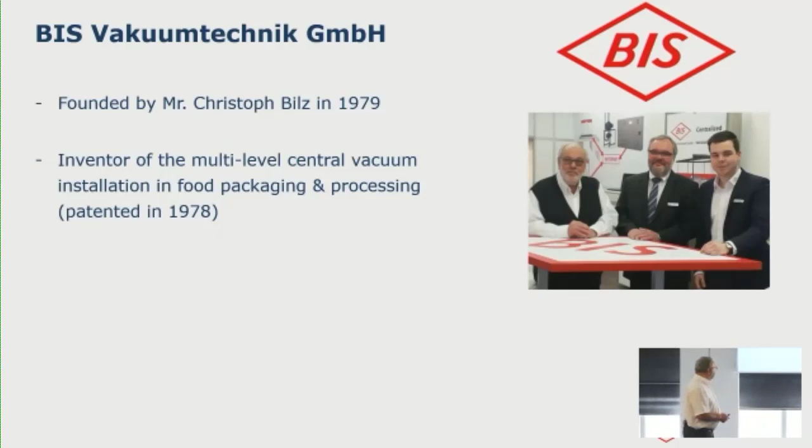Today, I am the general manager. I made an apprenticeship in a physical lab, where I worked for 6 years in high vacuum technology. Besides this, I attended night school, and afterwards I studied physics.

You see the three guys there on the almost white side - this is my son, he has now been in the company for 2 years also. We are located in Hennef, in the area of Cologne, nearly in the middle of Germany.

We work with approximately 20 workers up to now. We are focused on vacuum technology in the food industry. Vacuum is used in a wide range all over industry, but only in a small part - the packing industry - is where we work, where we are focused.

That is to say, we project, build, and maintain central vacuum systems. We repair and overhaul vacuum pumps. We have our own lab for the calibration of vacuum meters. And we make package testers - small testers where you can check if your package is tight or not.

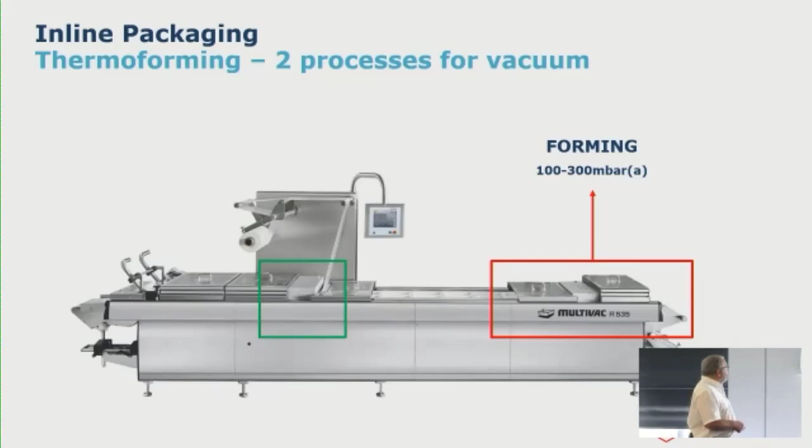Furthermore, we need vacuum for the sealing station, where the package is evacuated and afterwards sealed. Typical final pressure is between 2 and 20 millibar, depending on the product and on the type of package.

Why do we need vacuum? We need vacuum because of the lifetime of the product. Because food has bacteria, and the growth of bacteria depends on oxygen. Therefore, we have to reduce the oxygen in the package. We can do this by evacuating the package and sealing it.

We have a vacuum package. Or we can make a MAP, a modified atmosphere package - that is to say, evacuate to a pre-selected final pressure, and then regas with any gas like nitrogen or CO2. So we want to decrease the residual oxygen.

But what does it mean? How can we calculate the residual oxygen in a package, in a MAP? Air is a compound of nitrogen, oxygen, and some other gases like noble gases. Approximately 21% of the gas in the atmosphere is oxygen.

If you now make a MAP, evacuating and regassing with CO2 and nitrogen, the concentration of oxygen in the package afterwards can be calculated with this equation: the concentration of oxygen is the reached final pressure during the evacuation process divided by the pressure after regassing, multiplied by 21%.

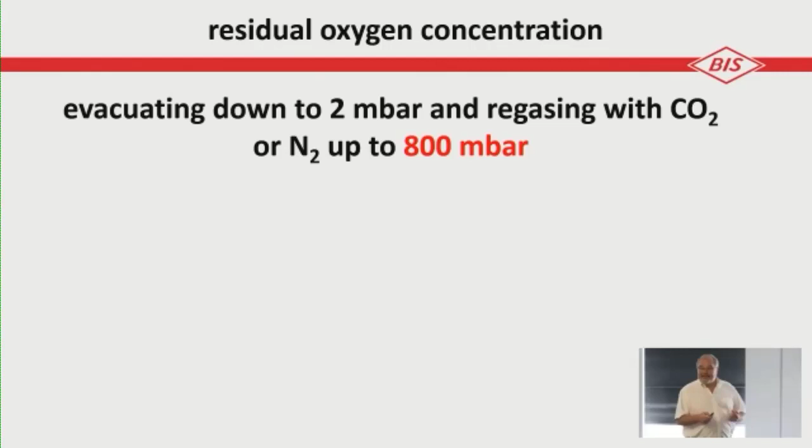Another example: we evacuate once again to 2 millibar, but now we're gassing only up to 800 millibar, not 1000 like before. Now the concentration of oxygen is only 0.05%, so this is very important. The residual oxygen concentration in a package depends on the final pressure during evacuation, but also on the pressure reached with the regassing of the sealing chamber. Mostly used is regassing up to 1000 millibar. So the residual oxygen is the final pressure multiplied with 0.02 in percent. Normally, if we want to reach a residual oxygen concentration lower than 0.1%, we need a final pressure of minimum 5 millibar in the package.

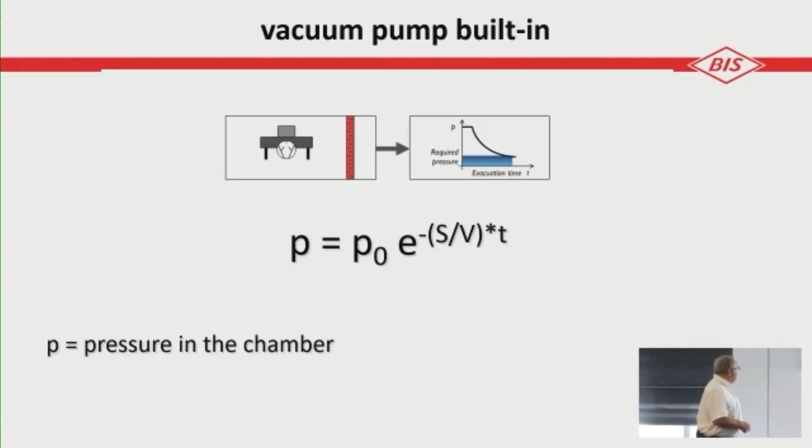P is the pressure in the chamber, P0 the starting pressure, S is the pumping speed of the installed vacuum pump, and V is the volume of the chamber. With this equation, it is very easy to calculate what is the required pumping speed, or what is the time we need to reach a desired pressure.

But that's not quite true, because this equation is only usable if the pumping speed of the vacuum pump is always constant with the pressure. Later on we will see this is not the case. So therefore, the calculation of evacuation is a little bit more complicated.

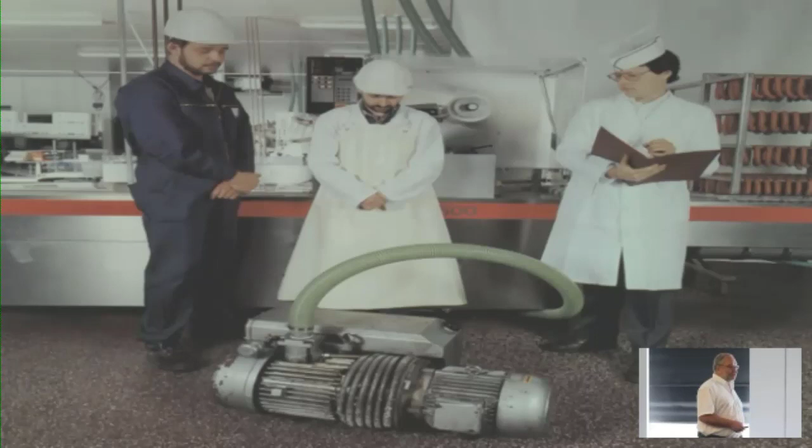Okay, the vacuum pump is in the machine, but the vacuum pump is not without any problem. The vacuum pump will make noise, it will make heat, and if you have a normal rotary vane pump, the total power draw of the vacuum pump is transferred into heat in a cooled, hygienic room. The next point is the hygienic aspect: the pump is oil lubricated, so we have the danger of oil contamination to the fresh product. We have a disrupted energy balance because the room is cooled and we have to cool down the heat load from the vacuum pump. And next point, if the pump fails, or if you need to do maintenance on the pump, you have to stop the whole packing line till the pump is repaired or removed. So therefore, there are some good reasons to remove this vacuum pump from the hygienic area where fresh, cooled products are packed.

What will happen if we remove the vacuum pump? The vacuum pump is out of the hygienic room, and we have a pipe between the pump and the packing machine. Now let's look again at the E function. First, the pressure drops down a little bit - the pipe is pre-evacuated by the vacuum pump - and now the vacuum valve is opened, and we have a very fast pressure equalization between the chamber and the pre-evacuated pipe. Therefore, the pressure drops down, let's say from 1000 millibar maybe to 850 millibar. But now the vacuum pump has to evacuate the volume of the chamber through the small pipe, which means we need much more time to reach the desired final pressure.

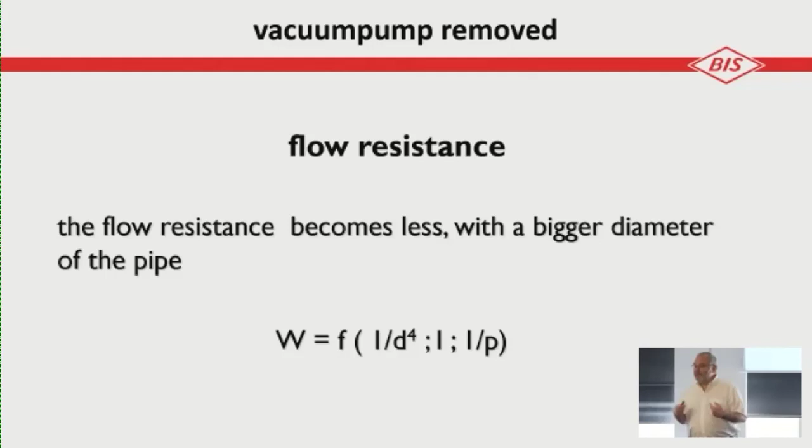So that is to say, the effective pumping speed at the packing machine depends on the pumping speed of the vacuum pump and on the conductance. And the conductance of a pipe is 1 over the flow resistance.

Should be more than enough? No, because now S over L is 1, and so the effective pumping speed is only 50%. So vacuum pump, 300 cubic meter per hour, and a pipe with a conductance of 300 cubic meter per hour - that means we have, in effect, only 150 cubic meter per hour, not more.

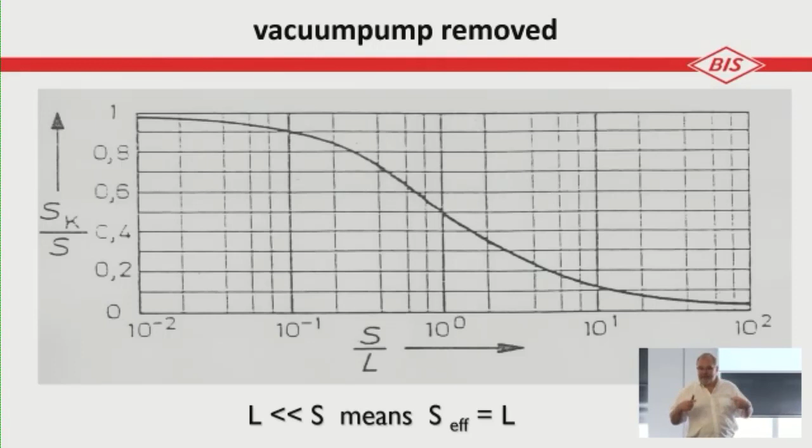So, very simple - let's use a big pipe. No problem with the flow resistance, everything clear.

But the next point is the effect of the volume of the pipe. If I have a pipe between the vacuum pump and the packing machine, I have an additional volume which has to be evacuated within each cycle. And the volume depends on the length of the pipe, and it's also depending on the diameter up to the power of 2.

So the effect of volume tells us we need small pipes, but the flow resistance tells us we need big pipes. And that's a problem - I have 2 effects working against each other. Of course, I can calculate the best fit for the pipe, but nevertheless, the evacuation time becomes much longer than before.

Let's make an example. We have a packing machine with a chamber volume of 13 liters. We want to reach a final pressure of 3 millibar, evacuation time 1.5 seconds. The pumping speed which is required is 181 cubic meter per hour. I have calculated this, so we use a pump of 250 cubic meter per hour, normally a rotary vane pump.

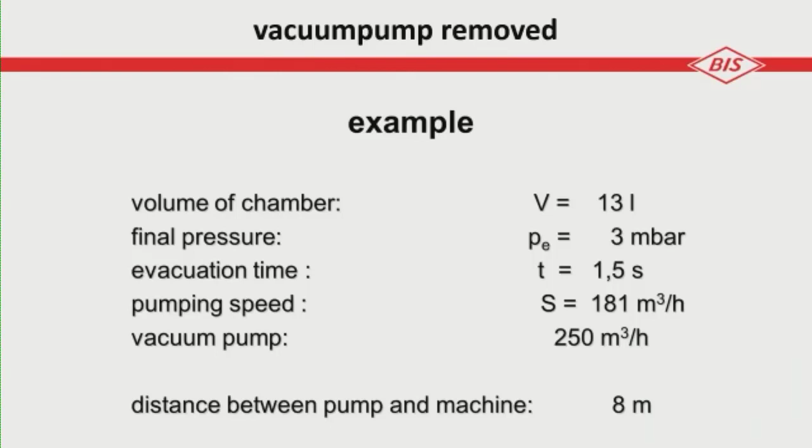But now the distance between the machine and the vacuum pump is 8 meters. I have calculated first a flexible hose with 1 inch, 34 millimeter inside. The volume of 8 meters of the pipe is 7.3 liters. The conductance is 396, so I need a vacuum pump of 800 cubic meter per hour.

If I use a 2-inch pipe, more volume, but also a bigger and higher conductance, I only need 480 cubic meter per hour. But if I use a 3-inch pipe with 90 millimeters inside, 51 liters, very high conductance, but now again I need 680 cubic meter. So for this example, the best fit is the flexible hose in 2-inch.

If I have a bigger pipe, I have less flow resistance, but more additional volume. So it is possible to calculate the best fit, but nevertheless, instead of 250 cubic meter, now I need 480 cubic meter per hour.

And by the way, there are some things written in a lot of books about vacuum technology which are definitely wrong. One of these is that the diameter of the pipe always has to be the same as the sucking connection of the vacuum pump. This is pure nonsense. You always have to calculate the best fit, it's not dependent on the connection of the vacuum pump.

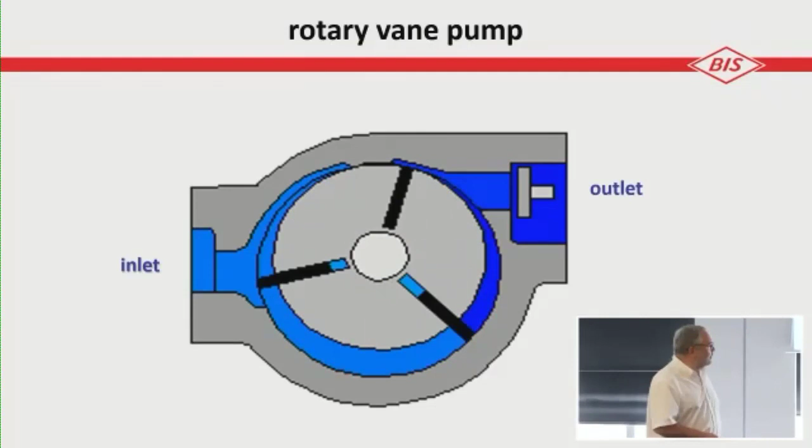So the 300 cubic meter pump we have at atmospheric pressure. At 10 millibar, we have maybe 220 cubic meters per hour. At lower pressure, we have 100 cubic meters per hour.

Okay, let's talk about booster pumps. This is a booster pump, also called a Roots pump, named after the inventors of the pump, 2 brothers named Roots. They found this pump in the States by removing the counter for gas in their house and adding a motor.

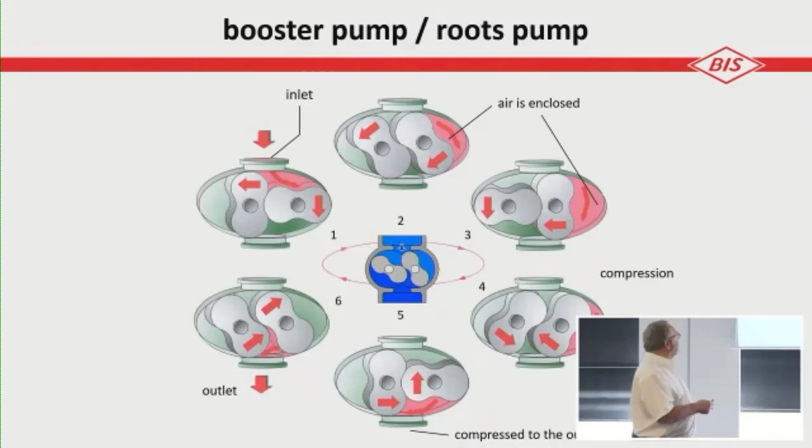So therefore, the maximum pressure difference between the sucking connection and the pressure connection is, let's say, approximately 50 millibar. That is to say, the booster pump can only compress from, let's say, 1 millibar to 50 millibar, but not from 1 millibar to 1,000 millibar. So therefore this pump cannot be used alone - we always need a backing pump.

Here's the booster pump. We have the sucking connection, we have the outlet. Here is connected a backing pump, which is making the compression work. That is to say, the booster can suck at 1 millibar, compress to 50 millibar, and we need a backing pump compressing from 50 millibar to 1,000 millibar.

But now we have to avoid the pressure difference being higher than 50 millibar, because otherwise we will destroy the pump. The easiest way to handle this is the so-called overflow valve. It's nothing else than a weight, and if the pressure difference is higher than 50 millibar, this is pressed up and we open a bypass, and the pump is safe. On the other side, the pumping speed goes down because we have a bypass around, but we have saved our vacuum pump. So that is to say, we have a backing pump, we have the booster pump - the combination - and the bypass valve.

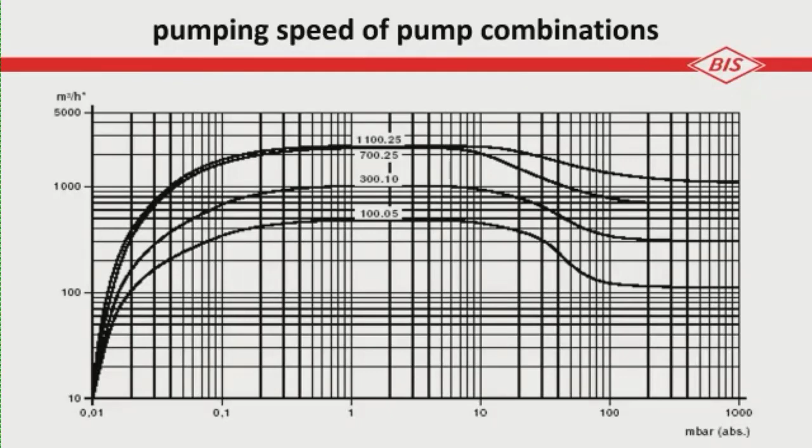So this is not very satisfying. We have paid a lot of money for a booster pump, but without any effect. So let's make a trick. And the trick is a buffer.

Between the booster pump and the backing pump, we use the buffer, a big pipe, so we can remove the vacuum pump, the rotary vane pump, out of the packing area. Let's remember, we have talked about hygienic problems, warming up in the room, and so on. Therefore, the oil lubricated and hot vacuum pump is out of the room. And here we have the buffer.

Now the vacuum valve opens, 1000 millibar in the sealing chamber. We open the vacuum valve, and now we will have a very, very fast pressure expansion between the small volume of the sealing chamber and the big buffer. The air runs through the booster pump and the pressure drops down directly to, let's say, 40 millibar. And then at 40 millibar, we have the booster pump directly running with full efficiency and a very short evacuation time.

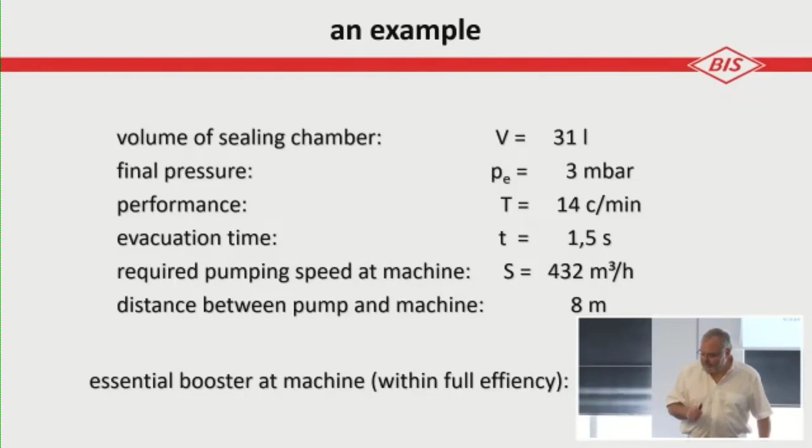Let's make a short calculation at this point. We have the sealing chamber, the packing machine. Then we have a lot of valves in the packing machines — valves for upper vacuum, for lower vacuum, for product vacuum. They are connected together, and then out of the machine, we have the suction connection for the vacuum pump, in 2-inch.

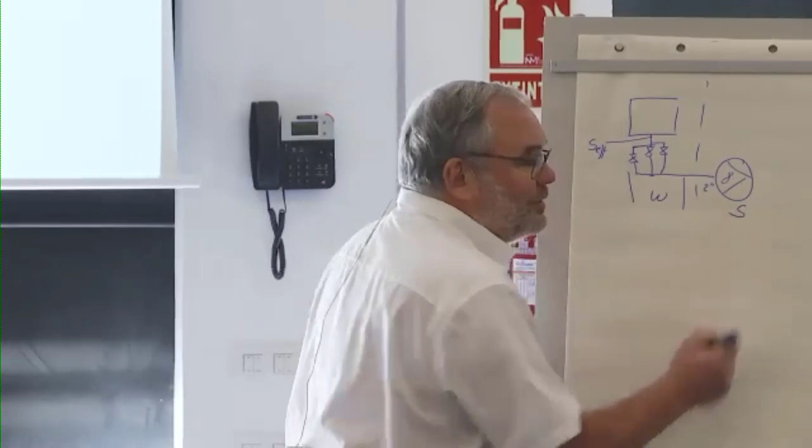Now we install a big pump here, a booster pump. We have the effective pumping speed at the chamber, we have the flow resistance, the internal flow resistance in the packing machine, and we have the installed vacuum pump. As you have seen before, 1 over the effective pumping speed is 1 over the pumping speed of the pump plus 1 over the conductance.

If we have... let's make an example. We use a vacuum pump of 500 cubic meters per hour.

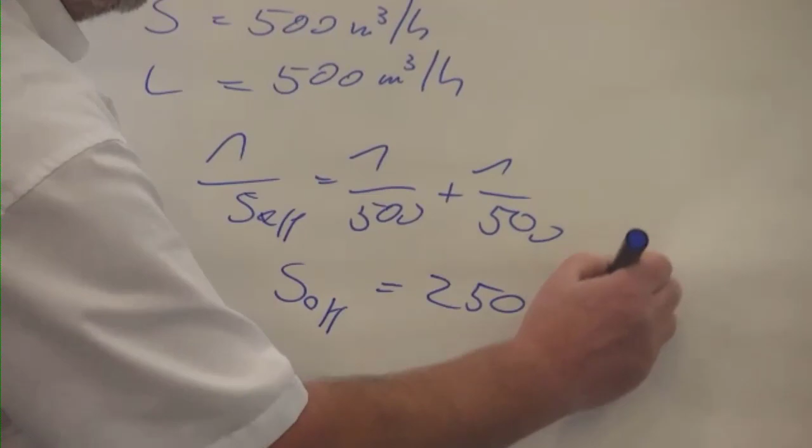The conductance in the packing machine is also 500 cubic meter per hour, so the effective pumping speed is 250 cubic meter per hour, not more. And now we use a bigger pump, 2000 cubic meter per hour.

Now I need my calculator. The effective pumping speed is now 400 cubic meter per hour. That has to say, we have installed a pump 4 times more pumping speed than before, but we have only 150 cubic meter more. So the problem is, it makes no sense to use such big booster pumps in packing machines because of the conductance in the machine. Much better is if we have the booster pump running all the time with full efficiency. What you have seen before makes much more sense than installing bigger and bigger booster pumps.

Okay, so it makes no sense to have a big booster pump. Let's make a clever solution: booster pump in the machine, buffer volume, and backing pump outside.

Yes, please, so I have a question. Okay, these calculations depend on the vacuum, the final vacuum, or is it always the same calculation? Does it work the same with packaging or is it the same with other applications? It is always the same. This equation does not depend on the pressure, not at all. This is over the whole range of the pressure, but the conductance is depending on the pressure. So the conductance of a pipe changes from 1000 millibar to 1 millibar, and there's an extreme change in the conductance. This is the reason why it's a little bit complicated to calculate the conductance. But nevertheless, this equation is not depending on the pressure. It's for the whole range.

Okay, we have our packing machine. We have learned a booster pump of 500 cubic meter per hour is more than enough. We have the buffer and the backing pump at 250 cubic meter per hour. What will happen?

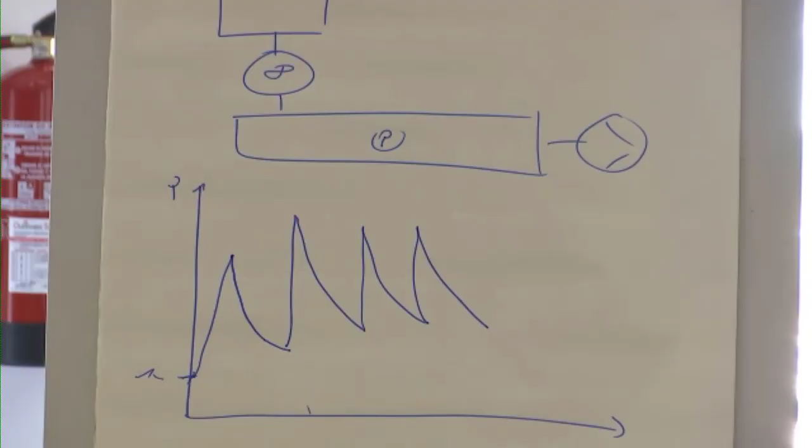Pressure goes up and down, up and down. And now we see the maximum pressure rising up, and now we can't reach the desired final pressure in the sealing chamber. So this will not work. After 6 or 7 cycles, they stop the machine because the display shows not enough vacuum.

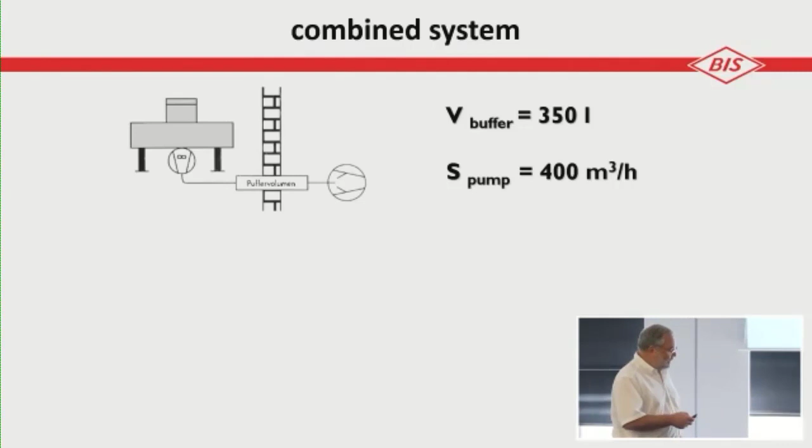Okay, let's try using a smaller buffer and a bigger pump. Just try it. Same again, but now after 3 cycles, the pressure in the buffer is too high. This does not work either. Okay, try the next thing: bigger buffer again, but maybe a smaller pump. And now it works.

So this is the problem with such a system. This system has to be calculated very well, because otherwise it will not work. So for each packing machine, depending on the volume in the sealing chamber and the required performance of the machine, I have to calculate the system.

And I've seen a lot of systems which are not working. And if I go to a packing machine, sometimes I can hear it. Because if I stand beside a packing machine with a built-in booster pump, and I hear the booster pump making a noise like a tram, going ooh, ooh, then I know that during this time, when the pump is so loud, the efficiency of the pump is 0. So therefore, this system has to be recalculated.

So the so-called combined system, yes please. Okay, another question - what's the way I can know what buffer I need and what pump I need and so on? This has to be calculated. Ask you? Yes, you have to ask me. Perfect, thank you very much.

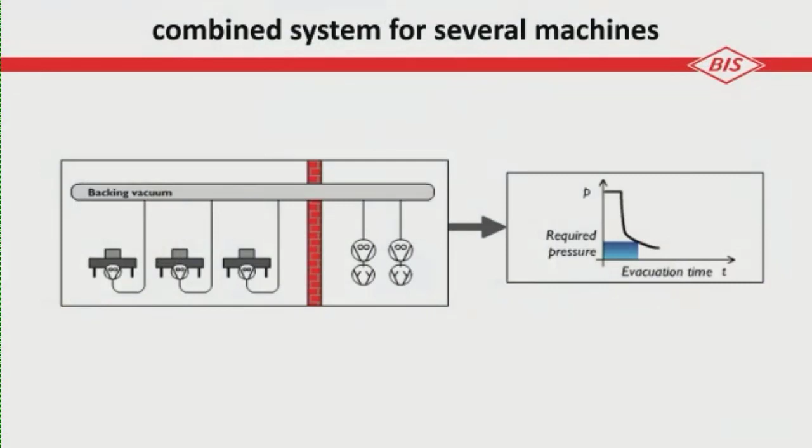Okay, the so-called combined system - it's also possible to make this for more than one machine. I have one backing pipe, a big backing volume pipe. I have the central vacuum supply out of the hygienic area, and in the machines, booster pumps are built in. That's a problem: for each packing machine, a booster pump is required. Therefore, this system is useful for packing plants with 2 or 3 packing machines. If there are more packing machines, this is much too expensive.

I have seen a lot of vacuum supplies, the so-called combined systems. I saw one approximately 8-10 years ago in Scandinavia, in Norway - a big meat processing plant with 20 packing lines. In each packing line, a booster pump, 2,000 cubic meters per hour. And in the machinery room, 6 rotary vane pumps, each 1,000 cubic meters per hour. And this is absolute nonsense.

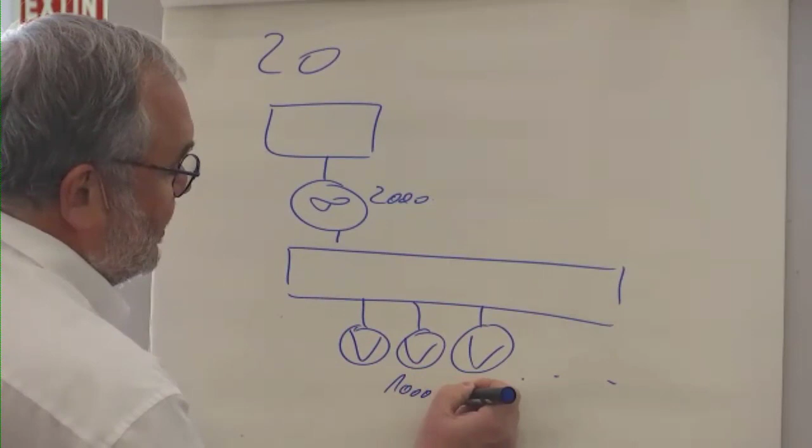So we have 20 packing lines, each with a booster of 2,000 cubic meters per hour. Then rotary vane pumps, each 1,000 cubic meters per hour. First thing we've seen before: if the system is well calculated, it makes no sense to have a 2,000 booster here - 500 is enough. The next point is that a rotary vane pump with 1,000 cubic meters per hour makes no sense in such a system.

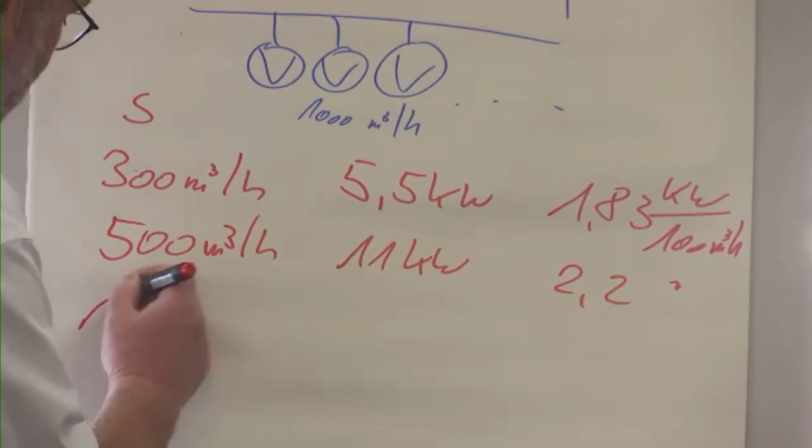Let's make an example. I have a rotary vane pump with pumping speed 300 cubic meters per hour, 5.5 kilowatts. That means 1.83 kilowatts per 100 cubic meters per hour pumping speed. A 500 cubic meter per hour pump, we have 11 kilowatts - that means 2.2 kilowatts per 100 cubic meters per hour. A 1,000 cubic meter per hour pump needs minimum 20 kilowatts, minimum - most times they have 30 kilowatts. That means 2.0 kilowatts. This is point 1: not to use such big rotary vane pumps.

Point 2: the cost for lubricants, oil, filters, and so on - they are rising up. So this makes no sense, the whole system makes no sense, with 20 booster pumps in each packing machine. Oh sorry, there's one good reason for this system - one good reason: to sell pumps, to sell big pumps. But that's all.

So that is to say, for a food processing plant with, let's say, more than 4 packing machines, the combined system makes no sense. It is sometimes used because it is easy to calculate and easy to build up such a system. But if we have more packing machines, we need another solution, and the best solution here is the totally centralized vacuum system - that is to say, no more vacuum pump in the packing room.

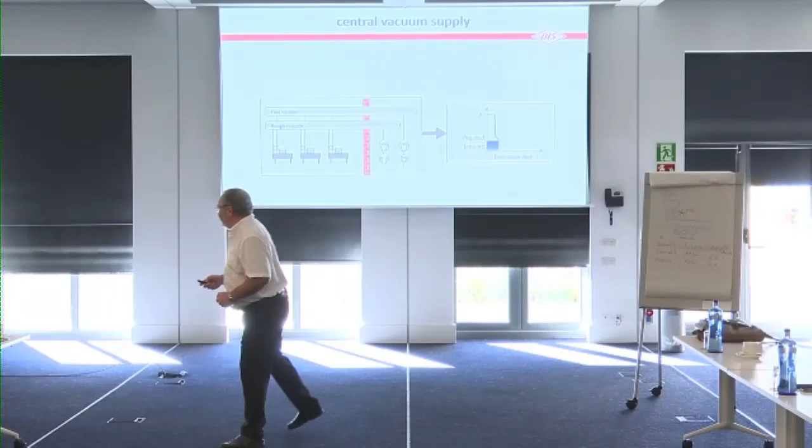It is true if you make the combined system with a booster at each machine and one buffer pipe - then we need the booster, and then you're absolutely right, the booster has to be directly as near as possible to the sealing chamber at the machine. But this is only if you have the combined system with one pipe. Now I want to show you a better solution, without any pump in the packing room. Sounds good, thank you very much.

You're welcome. So we have no booster in the machine, but now we have two pipes - one called rough vacuum, one called fine vacuum. In the machinery room, you have the vacuum pumps.

The rough vacuum is evacuated to a pressure level of approximately 50 millibar. And the fine vacuum is evacuated to a pressure level of 2 millibar.

Each packing machine is equipped with a special valve block. There are two valves beside it, connected to the sealing chamber. One valve is connected to rough vacuum, the other valve is connected to fine vacuum.

Now, if the machine wants to evacuate 1000 millibar, we open the valve to the rough vacuum, and we have a very fast pressure expansion between the chamber and the rough vacuum. The pressure goes down from 1000 millibar in the sealing chamber to the 50 millibar rough vacuum level. We close the valve, short delay, and we open the second valve for a second pressure expansion down to 2 millibar.

And this is the fastest possible evacuation of a fixed volume, the evacuation by pressure expansion. This is the so-called double-stage pressure expansion.

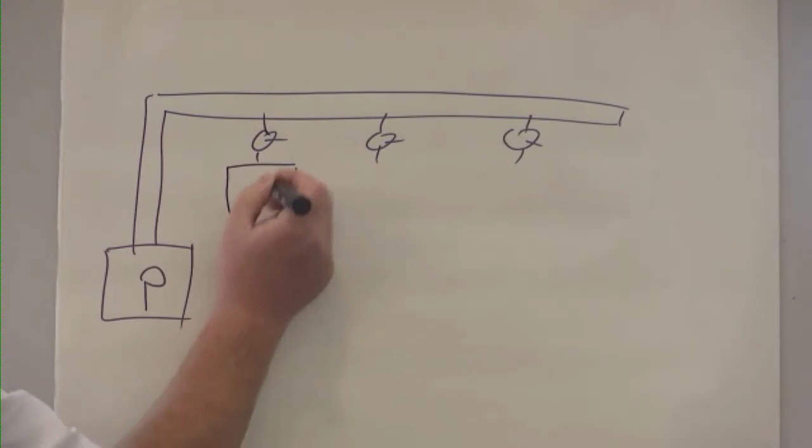They are starting with an experiment. The first student arrives early in the morning, 10:30. He connects his equipment, opens the valve, and he has compressed air, pressure coming out. The next guy arrives half an hour later, connects his equipment, opens the valve, and he also receives compressed air. It's less air than the first one had before, because now there are two machines connected, but nevertheless, air is coming out.

One week later, same physical lab, but now we have a system with vacuum. Big central vacuum supply downstairs, and in the lab, ball valves for each working place.

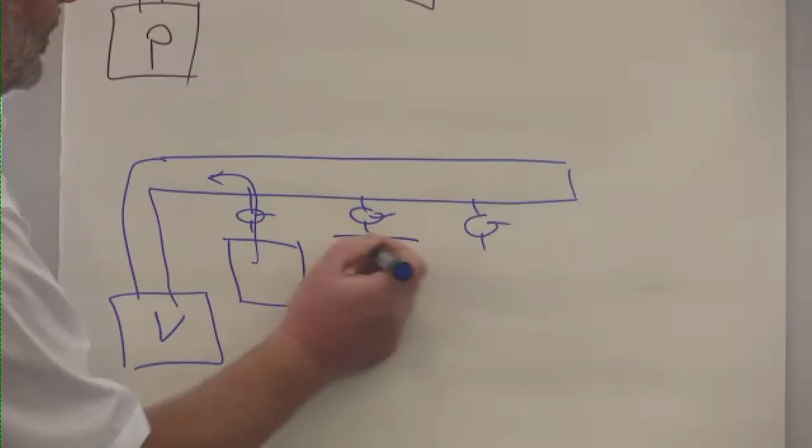The first arrives early in the morning, 10:30, connects his equipment, opens the valve, and the air is going out. He says, okay, everything works, and goes downstairs to have a coffee. The next one arrives half an hour later, opens the valve, the air goes out, and back at the first working place, air goes in.

And this is the big difference between vacuum and compressed air. If you have a compressed air system, you open a connection, air will always come out, it will never happen that air goes in. But this change in flow direction is possible with vacuum.

Now, if we have one vacuum pipe, one central vacuum station, and five packing machines, the first machine wants to reach, let's say, final pressure 5 millibar. At 10 millibar, the next machine opens the valve. Then we have to avoid that the pressure here rises up again from 10. So therefore, we need an enormous volume and an enormous pumping speed here, and this makes no sense.

It is possible with one pipe, but only if we have booster pumps in. Without booster pumps, with one pipe, it will not work. And the trick is the 2-stage system.

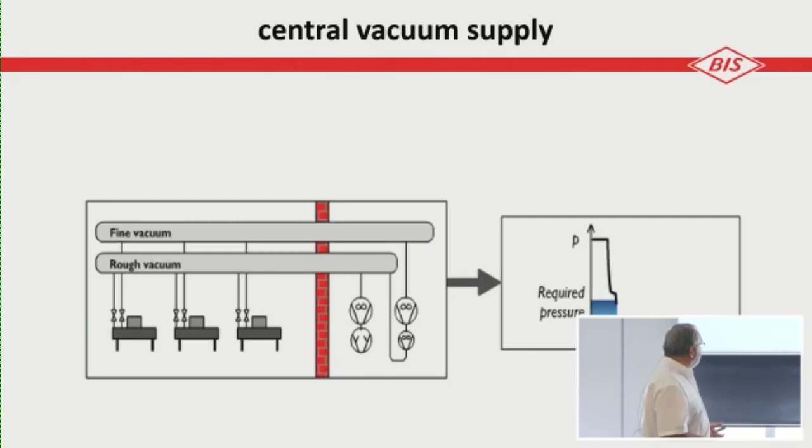So we have the fastest possible evacuation of the vacuum chamber by a double stage pressure compensation between rough and fine vacuum: first 50 millibar rough vacuum, short time delay, then 2 millibar fine vacuum. The shortest possible evacuation time now only depends on the internal flow resistance in the packing machine, and we have no vacuum pump in the room.

So the advantages are shorter evacuation time and less power demand. First of all, we do not have the vacuum pump in the room, so there's no heat up of the room. We are saving energy for cooling the room. And the next point is we need less vacuum pumps than before.

But why this? Normally this can't be - we have removed the vacuum pumps from the room, yet the machines become faster than before, and we need less pumps. Why? So what is the vacuum pump doing?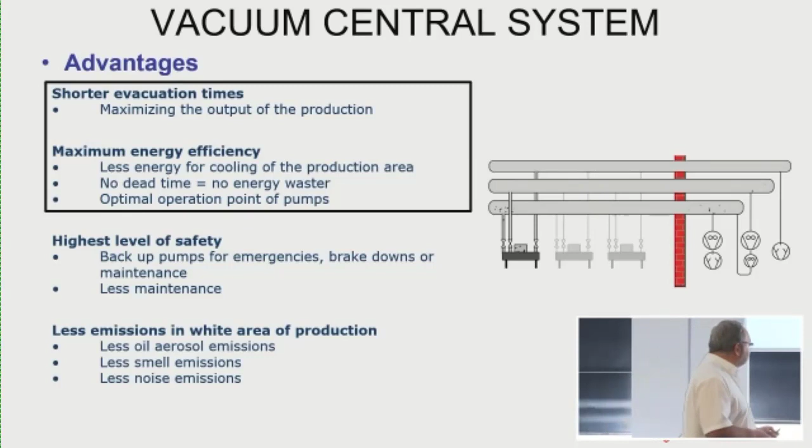So the working principle - we have the packing machines.

Sorry Felix, could I ask a question? Yes, please, yes please. Could you please explain these signs - what kind of pumps are these that you drew here? That's a very good question, thank you very much.

Before, I talked about two vacuum systems called rough and fine vacuum. Rough vacuum at 50 millibar, fine vacuum at 2 millibar. Now we have a third system here, auxiliary vacuum. The auxiliary vacuum is used for the forming of foil.

Why this? It's also possible to connect the forming station to the rough vacuum. Yes, of course it's possible, but it's not clever, because for the forming of foil we need, let's say, 150 millibar - that's more than enough. Only if you have a very thick film, maybe sometimes you need 180 millibar. More than enough - normally 150 millibar is more than enough to form the foil.

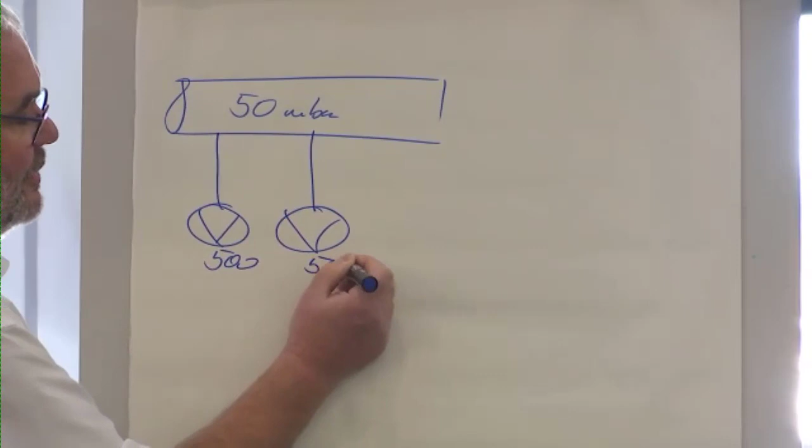Rough vacuum system, I need 50 millibar. I have calculated my system and seen, okay, I need a pumping speed of 1,000 cubic meters per hour. I can realize this with two backing pumps, each 500 cubic meters per hour. That means 22 kilowatt.

Or, I use one booster pump at 1,000 cubic meters per hour, and two backing pumps at 300 cubic meters per hour, 5.5 kilowatt and 3 kilowatt. That means 14 kilowatt.

And that's the reason why I like to use booster pumps. Booster pumps have a very high pumping speed with very low power demand. In the centralized vacuum system, I can install and run the booster pump always at the point of best efficiency. So therefore, we need booster pumps because we want to save energy.

That is to say, for the rough vacuum, we have a combination of a booster pump and a backing pump, a rotary vane pump, or also possibly a screw pump.

Fine vacuum. For fine vacuum, for the same reason, I also need a booster pump. But now I do not use a backing pump. I have a second booster pump and then go back to the rough vacuum. Why this?

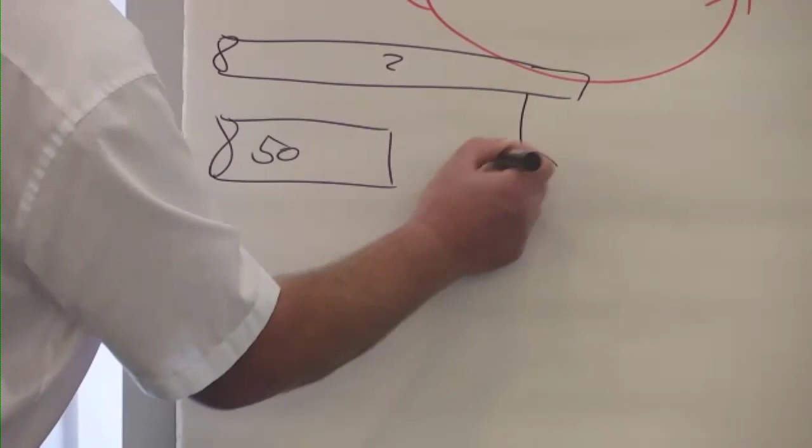We have rough vacuum at 50 millibar, fine vacuum at 2 millibar. I have a booster and a backing pump, 1,500 cubic meters meaning 14 kilowatt. But I can save this pump. I do not need this pump if I compress directly to the rough vacuum.

I have an additional load on the rough vacuum because the air from the fine vacuum also goes into the rough vacuum. But this is not a lot, because the volume of the chamber from 1,000 millibar to 50 millibar goes to rough vacuum. That's to say most of the air, 950 millibars multiplied by the volume, goes to rough vacuum, and only a small amount of air from 50 millibar to 2 millibar goes to fine vacuum. So for rough vacuum, it makes no big difference to also add the air from the fine vacuum. And I do not need a 500 cubic meter pump, and I can save 11 kilowatt.

So therefore, the fine vacuum is evacuated by a booster pump, which is compressing to the rough vacuum. But why do we have two pumps?

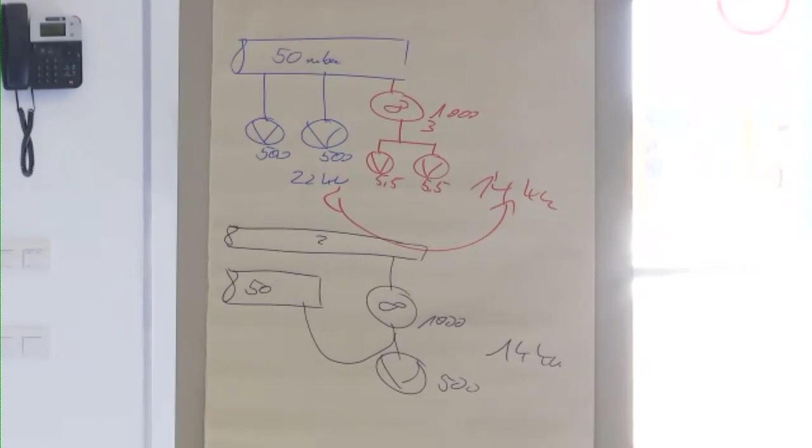Hello, I have a question in the chat from David: when does it make sense to apply this hybrid fine and rough vacuum system, between which pressures, from where to where? Is this always the best solution?

It depends on the number of packing machines, and on the performance and required final pressure of the packing machines. Normally, for 1 or 2 packing machines, the best solution is a combined system. For more than 5 machines, no doubt you need a centralized system with 2 pressure levels.

If you have 3 or 4 machines, sometimes I calculate both versions just to compare. So if a customer has 3 machines, I calculate a combined system and a centralized system, and tell them the combined system costs approximately this, and the other system costs like this. Then it's up to the customer to decide.

It's also a question of whether the customer has a big plant and knows exactly that they want to grow production over the next 5-10 years, has enough space in the packing room, and plans to add more machines. Then it's also possible for 2 machines to start with a centralized system with 2 pipes. So it's always depending on the customer.

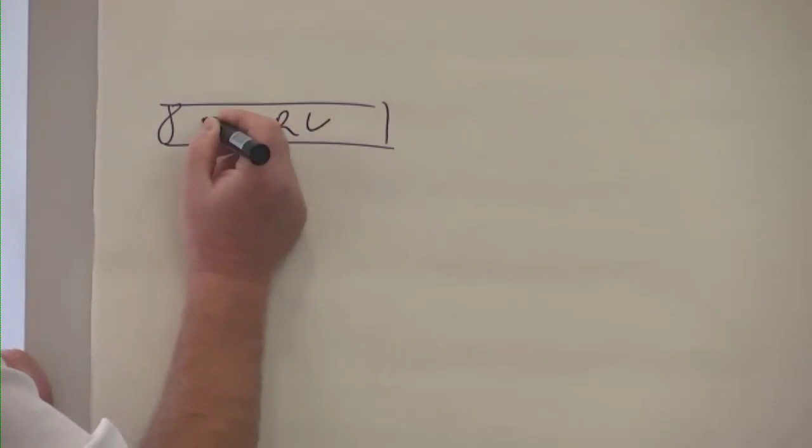We have the rough vacuum, 50 millibar. We have the fine vacuum, 2 millibar. And we have a packing machine connected to rough vacuum and to fine vacuum. The pressure in rough vacuum goes up, and if the valve opens, it goes down. So you go up and down over time.

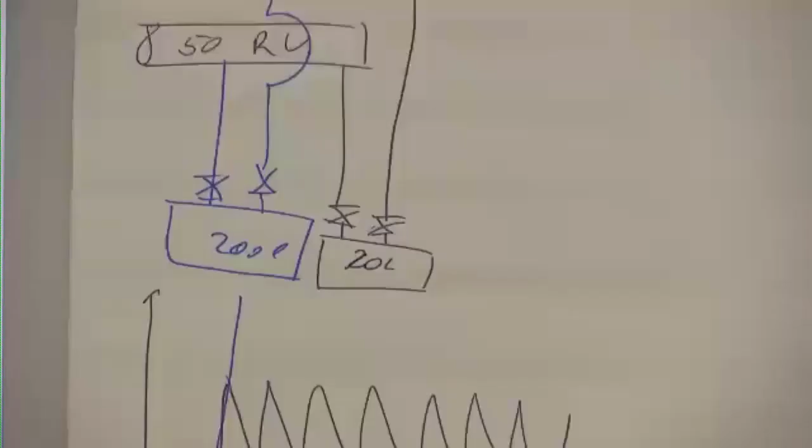It is possible, if we use a trick. The trick is you have a third system called auxiliary vacuum at 100 millibar. For these big chamber machines, we make a three-stage pressure expansion. First step to auxiliary vacuum, the pressure goes down from 1000 to 100 millibar, and then connects to rough vacuum. Then it's exactly the same load for the rough vacuum as if we have a smaller thermoformer at 1000 millibar. So if we need vacuum for forming foil for a thermoformer, or if we have big chamber machines, then we need three systems.

If you have no chamber machines and no vacuum for forming is required, then also a system with two pipes, only rough and fine vacuum, is possible. So the auxiliary vacuum is only used in a three-level installation, used for the thermoforming process. It's used for the big chamber machines. And we use oil lubricated pumps, rotary vane pumps, or dry running screw pumps.

The pressure in auxiliary vacuum depends on the type of foil. If I have a thin foil or a thick foil, what kind of foil it is. It depends on the depth of draw, on the size. It depends on the type of heating. We'll talk about this later on.

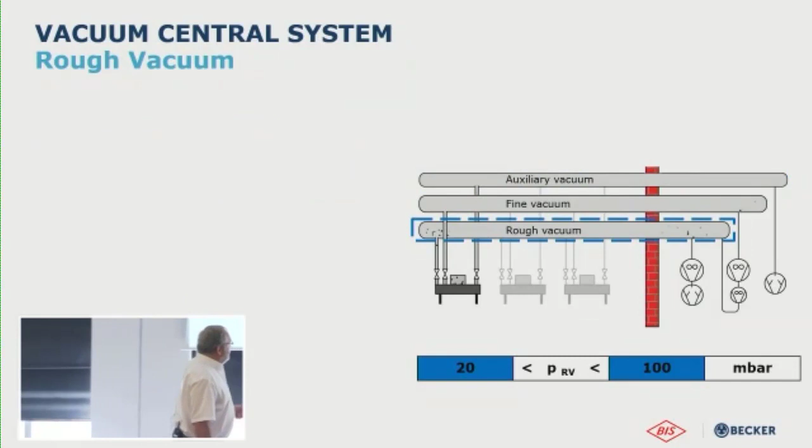And we have the rough vacuum. The rough vacuum can be between 20 and 100 millibar. It's up to me, because I always tell my customers, when I calculate a centralized system, I play—it's a game for me. Because I have a number of machines, I have information about the machines, I have existing pumps, and then I calculate. Okay, one pump here, one pump there. I calculate the pressure level of rough vacuum, 50 millibar or maybe 80 millibar.

If I have 80 millibar in rough vacuum, more gas will go to the fine vacuum. So it's a game. And I play, and then I say, okay, this is the best version to have the effect with the lowest number of vacuum pumps, to use less pumps and to reduce power consumption. So it's up to me what pressure in the rough vacuum you will have later on.

The rough vacuum is always used in 2- and 3-level installations. It's for the thermoformers—the first step to rough vacuum from a thermoformer, or if you have a chamber machine, the second step from auxiliary to rough vacuum. You always use oil lubricated rotary vane pumps, dry running screw pumps, and booster pumps.

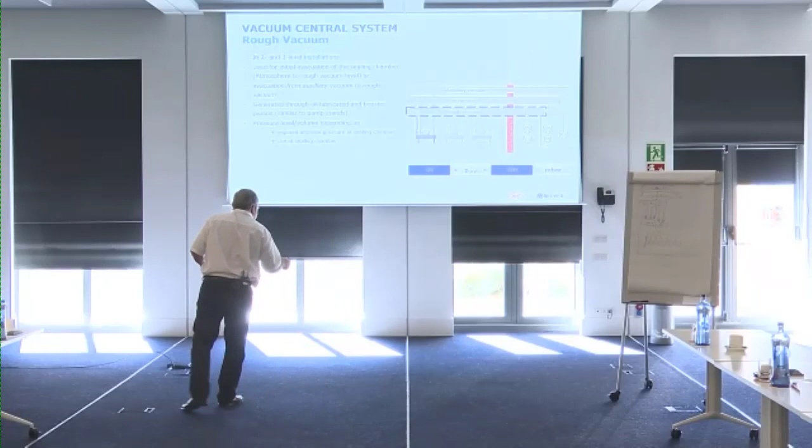Yes, of course, because the required pumping speed in rough vacuum and in fine vacuum depends on the number of machines, and it depends on the product of the volume of a machine multiplied with the performance of the machine. So I need to know the volume of the machine, the desired performance of the machine, and the product of volume and performance gives the gas load for the system.

And therefore, for the total number of packing machines, I have my gas flow coming to the rough vacuum, and then I can calculate the required pumping speed to reach the desired pressure. As I've explained before, the pressure is up to me.

Yes, hello, one question from my side. Do you need the volume of the machine, the volume of the chamber, or the volume that should be extracted out of the chamber? I mean, with product inside the chamber. Yes, for your calculation. And what difference does this make?

Yes, it is a big difference. The first difficulty we will have is for the forming station, for the heating, we will see later on. And next, to calculate the volume of the sealing chamber is not so easy. It depends on the size of the chamber, but also on the product, and on the filling of the package. Because you can form a mold, let's say 100 millimeters, have a big package, and pack only a small piece of meat inside. It doesn't make much sense.

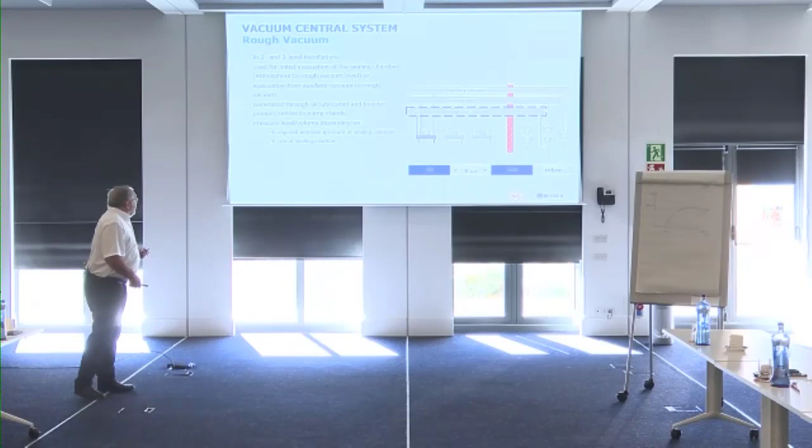Okay, back to the rough vacuum. The pressure depends on the pumping speed on the sealing chamber and on my idea of the centralized system. We have fine vacuum, which is always used in 2 or 3 level installations if we need a low pressure. If the customer is packing bread or anything else at 100 millibar, no fine vacuum is required. But for all meat processing plants, I think you need a final pressure lower than 10 millibar, then we need a fine vacuum system.

Also very important: we have a packing machine, and the desired final pressure, depending on the product, let's say is 5 millibar. So I make a centralized vacuum system, rough vacuum with 50 millibar, and fine vacuum with 5 millibar, because the desired final pressure for the machine is also 5 millibar.

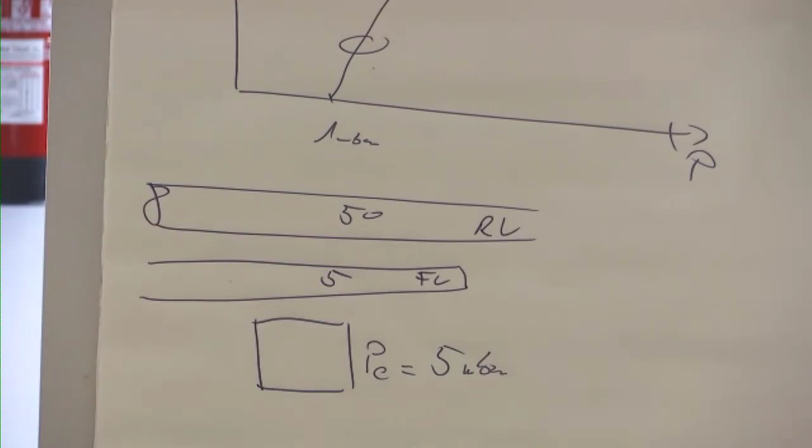I think you won't be happy with this system. The pressure in the fine vacuum system has to be lower than the desired final pressure, because otherwise we won't reach the speed of the packing machine.

We want to evacuate with a double stage pressure expansion: rough vacuum, short time delay, and down to fine vacuum. But if we have 5 millibar here and 5 millibar there, very near pressure, I will have no gas flow. The gas flow needs too much time, so the evacuation curve will be like this.

So therefore, the pressure level in fine vacuum has to be lower than the desired final pressure in your packing machine. Beside this, you also need a little bit more pumping speed to avoid any problem if you have a small leakage in the packing machine. And you will have leakages at packing machines. Minimum 3 millibar.

So the question was: what pressure difference is needed between the fine vacuum and the desired final pressure in the packing machine to avoid the problem with the gas flow? Minimum, let's say, is 3 millibar. Better is 5 millibar. So there, it's a good chance to talk about high vacuum lines or skin machines.

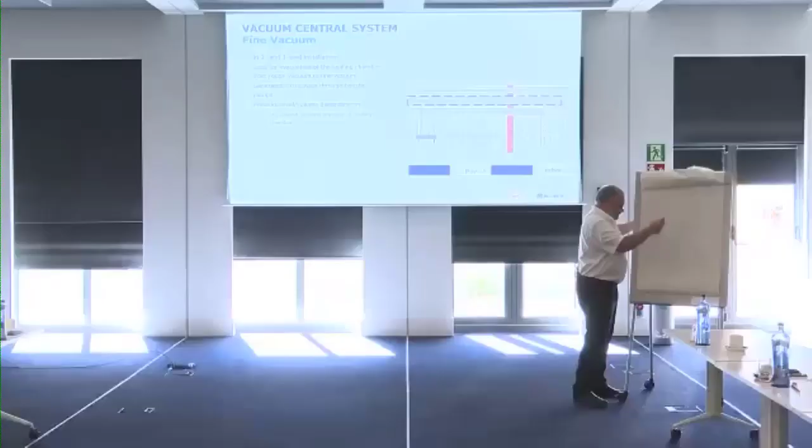Fine vacuum, I have one machine. I have auxiliary vacuum, that's clear, but let's only look at the fine vacuum. This machine needs a final pressure of 10 millibar. The next machine, final pressure, depending on the product, 8 millibar. And there's one flat skin machine with 2 millibar.

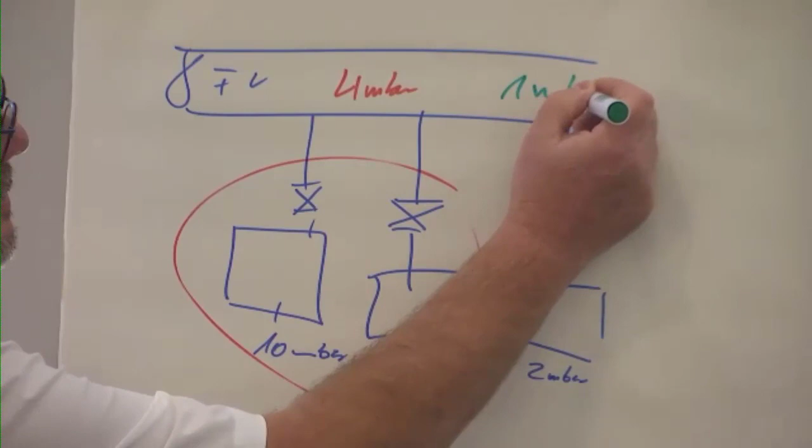So that is to say, for these two machines, the final pressure in fine vacuum should be, let's say, 4 millibar. More than enough. But for the skin machine, I need 1 millibar, normally lower than 1 millibar. That's not possible in a centralized system.

So I have to drop down the pressure in fine vacuum from 4 to 1 millibar. That means I need 4 times the pumping speed in fine vacuum, only for this machine. Maybe for these 2 machines, I have a booster pump of 1,000 cubic meters in fine vacuum. If I connect this machine, I need 4,000 cubic meters. And this makes no sense.

That is to say, if the customer has a skin machine, a flat skin machine, or a high vacuum line, then we have to add a booster pump here, a small booster pump, only for this machine. It's not the same as the combined system we had before, but we also have rough vacuum, also connected to all machines. But for the high vacuum line, for the flat skin machine, we need an additional small booster pump. And this is much cheaper, a small 500 cubic meter pump, than adding much more pumps in the fine vacuum.

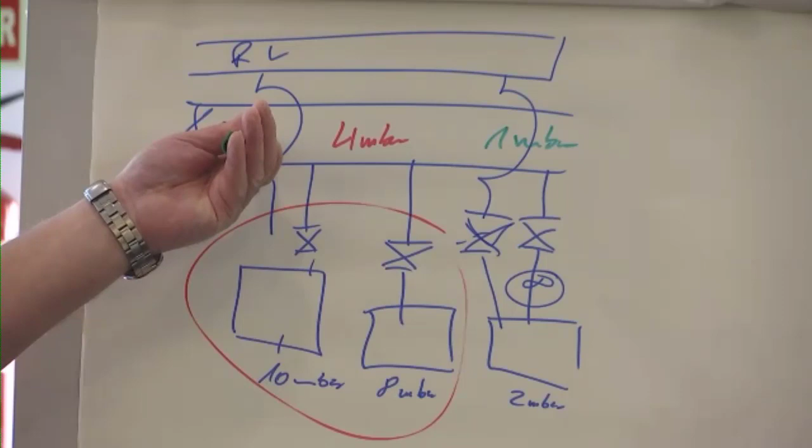So therefore, this was a very good question. And once again, we don't want to sell a lot of pumps, and we don't want to sell big pumps. We want to sell the best solution, the clever solution. And the clever solution in this way is to add a small booster here. So we have talked about this, that the pressure in the fine vacuum has to be much lower than the desired final pressure of the packing machine.

Let's have a look again at the evacuation curve. With the integrated vacuum pump, with the vacuum pump in the packing machine, the pressure goes down following the so-called e-function. And with the 2-level central system, we go down to 50 millibar, short delay, and then very fast pressure expansion down to 2 millibar.

It's just to show that with the centralized vacuum system, we will save time. Faster evacuation. If you need a final pressure, let's say 10 millibar, this is the time you save. Your machine becomes faster with the centralized system.

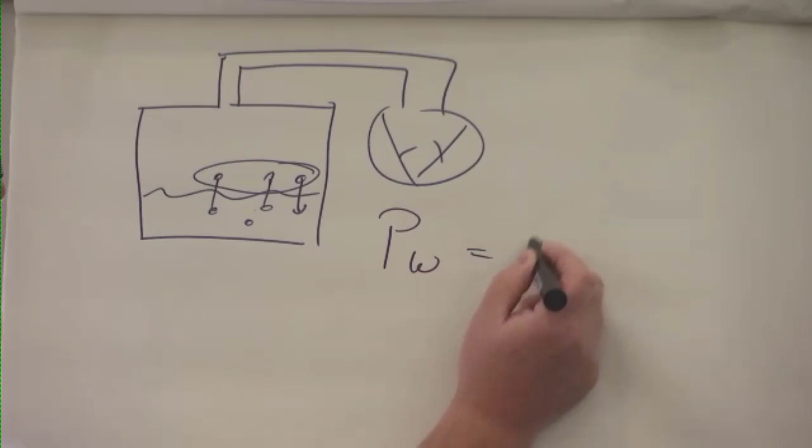And the pressure of the water particles is depending on the number of particles multiplied with the constant and multiplied with the temperature. And that I can make a curve, the so-called vapor pressure curve of water. The curve looks like this - this is the vapor pressure of water depending on the temperature. And there's one point which is very well known: it's the boiling point of water. Because if the temperature is so high that all the particles want to go into the gas state, they will leave, suddenly they will leave the surface, and this is what we are calling boiling.

And this point is at 100 degrees, the vapor pressure is 1000 millibar. So the pressure is so high that all the particles can leave the water surface suddenly. This is called boiling. And if you go on a high mountain where the atmospheric pressure is lower, the water boils earlier. That's a well-known effect.

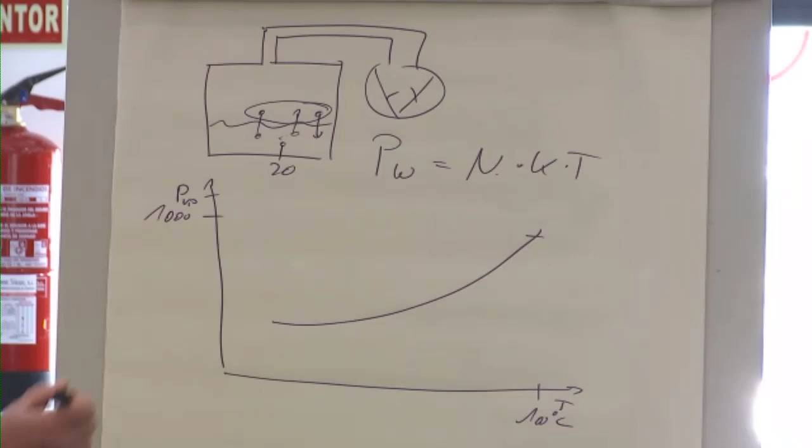So let's go back to the evacuation. Let's say the temperature is 20 degrees and we do not have water, we have fresh meat, wet fresh meat in the package. Temperature of the meat, 20 degrees. At 20 degrees, the vapor pressure is, I don't know, 8 millibar, I'm not sure, but in this range. Now we go down, the pressure goes down, and at the point of 8 millibar, the vapor, the water of the product comes up. So the pressure will not go down because we are only boiling water from the product. So the final pressure is 8 millibar.

No, we can go deeper because of the cooling effect. You know this - if you take a shower early in the morning, go out, open the window, you feel cold. Why? Because the water on the surface of your body, due to the wind from the window, has to be boiled, and therefore energy is required. And this energy is drawn from your body. And the same happens here: we are drying the product, therefore we are cooling down the product, and we are going down on this curve till we reach the desired final pressure.

But now we need time for getting water out. We are losing weight of the product, and we don't like this, so it makes no sense. So therefore, the first thing in general is you have to pack your product as cold as possible. If you have a cold product, it has to be packed as cold as possible. Otherwise, you will have a problem.

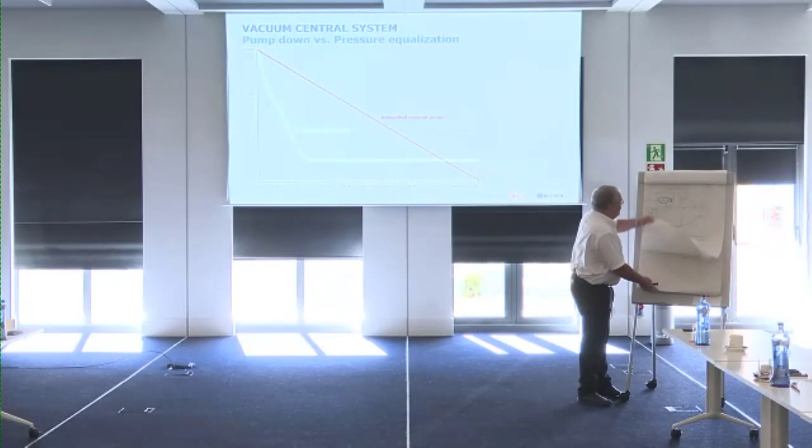Once again, only fine vacuum. So we have a number of machines connected to fine vacuum. The pressure in fine vacuum over time is always going up and down, always up and down. The mean value of the pressure, PM, only depends on the installed pumping speed in the central vacuum system for a given number of machines. So if I add more pumps, I can press the whole curve down. This is the mean value, only depending on the pumping speed.

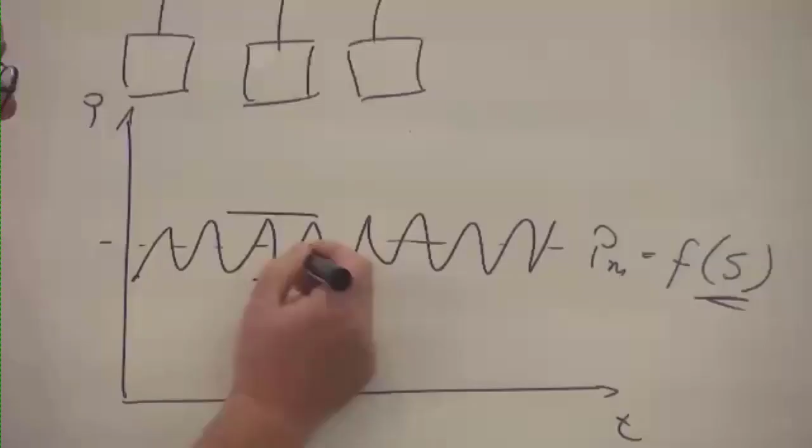But the pressure difference between lowest and highest pressure only depends on the volume of the pipe here. So this is the next step where I make my game in calculating the central vacuum system. I can add more pumping speed to press the curve down, or I can increase the volume to press minimum and maximum together. Everything is possible. I always have to stay lower than a given maximum level.

At this point, I will calculate the maximum pressure in the fine vacuum. I will calculate as if all packaging machines are evacuating at exactly the same time. Finished, no discussion about this. You can argue that if I have 10 packing machines, it will never happen that all 10 are evacuating at the same time. From a statistical viewpoint, you're right, but it may happen. Therefore, I always calculate the volume and capacity of a central vacuum system assuming all machines are evacuating exactly at the same time, without any discussion.

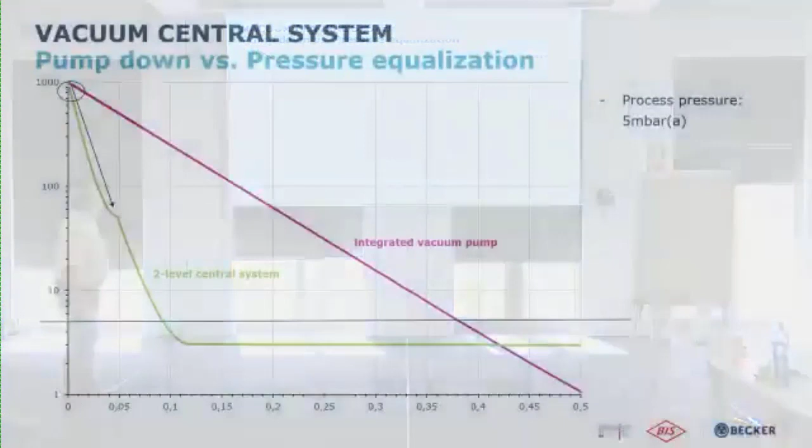So here it's shown again. We want to reach a final pressure of 5 millibar. We can achieve this with the integrated vacuum pump within a time of 0.3777 seconds, or with double stage pressure expansion: first down to rough vacuum at 50 millibar, then a second pressure expansion down to the required final pressure of 5 millibar.

How can we connect a packing machine to a centralized vacuum system? We've talked about this before. We need rough and fine vacuum. Normally we have one vacuum connection at the machine where the vacuum pump is connected now.

This modification of the packing machine may be done by the manufacturer of the machine. Most of all, if the customer buys a new machine, all well-known producers of packing machines offer packaging machines directly designed and prepared for connection to central vacuum supply. That is to say, the machine is equipped with valves for rough and fine vacuum and can be directly connected to the central vacuum system.

Existing machines can be modified by the manufacturer of the machine, or if desired, we can do this modification. For this, we have a modification kit: we have the valve block with 2 valves for rough and fine vacuum. They will be connected to the sealing chamber. We install a pressure transmitter in the machine to measure the pressure in the sealing chamber, and we install a very small electrical unit.

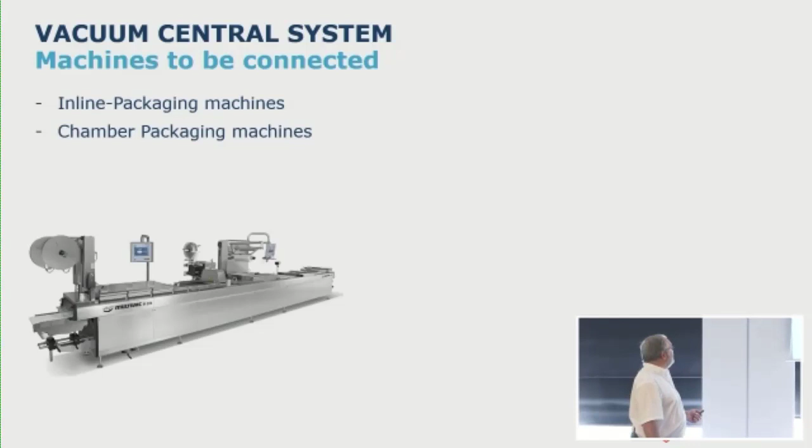To a central vacuum supply, we can connect thermoformers, chamber machines, and also other food processing machines like a vacuum tumbler, for tumbling the meat. There we need vacuum, normally a pressure of 200 millibar is required, and this can also be connected to a centralized vacuum system. The same goes for sausage fillers, cutters, and handling machines. Every machine which needs vacuum in a food processing plant may be connected to one centralized system.

But nevertheless, the repay of the costs will be realized with the packing machines. Because once again, for the packing machine, I increase the performance and decrease the power consumption for vacuum generation. So this investment will be repaid, and you will see later an example. It will be repaid very fast.

I can't make this calculation for a vacuum tumbler. A vacuum tumbler has a working time of between 8 and 12 hours. It will not become 1 minute faster with the centralized vacuum system. For a sausage filler, there's a small vacuum pump, 40 cubic meter per hour built in. I will not save any energy with this small pump. So the only reason for connecting production machines to a centralized vacuum system is the hygienic aspect, and the aspect that if a pump fails, you have a standby pump. But the return of investment is within the packing machines.

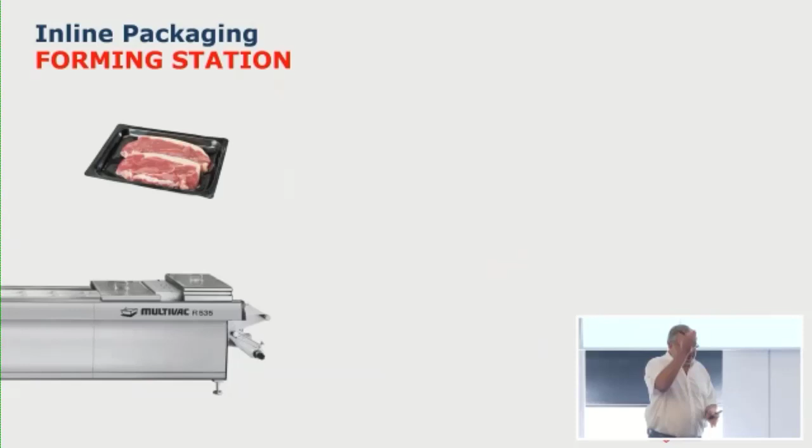Once again, the thermoformer has the forming station and the sealing chamber. Let's look at the forming station. Normally this is the easiest part for the centralized vacuum system, because it's just a single stage expansion, only 150 millibar pressure, not a big problem. The problem is the packing machine, because there are a lot of different types for the forming of the foil.

In the packing machine, the bottom web is transported into the forming station, and now the foil has to be warmed up, because you can't form a cold foil. There are different possibilities, different ways to heat up the foil. You can have a heating plate in front of the forming station, or you can have the heating plate on top of the forming station.

That is to say, in the first station, the foil is sucked to a heating plate and warmed up. In the next step, the foil goes into the forming station, sucked from the bottom, and the mold is formed. This is the so-called preheating.

Or you have the heating plate on top of the mold, so the foil is sucked up to the heating plate and afterwards sucked down. Or it is not sucked up, it is pressed up to the heating plate with compressed air, and then afterwards sucked down. With this you have two possibilities: fill up with compressed air up to 2 bar, press the foil to the heating plate, and connect directly to the vacuum pump, or release the atmospheric pressure and then connect to the vacuum pump. So there are a lot of different types of heating the foil, and there's a big difference in the load for the central vacuum system and the vacuum demand, depending only on the way of heating up the foil.

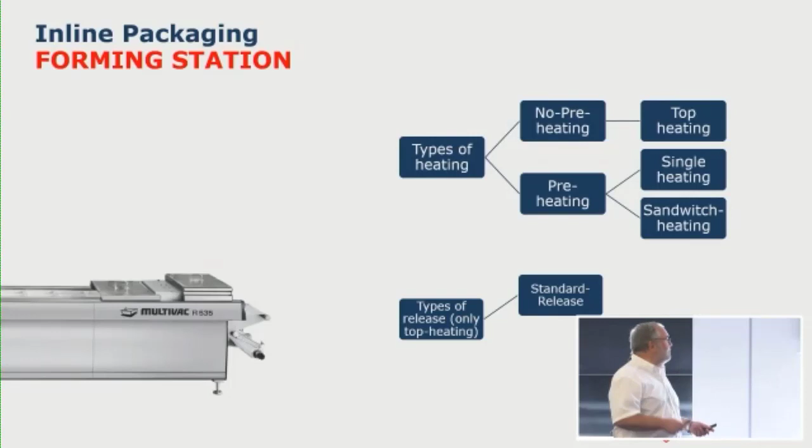So first, if you have no preheating, then we have the heating on top of the form, a top heating. If we have preheating, it could be a single heating plate, or it could be a sandwich heating with a heating plate on top and below the foil. This is sandwich heating. Or if we have the heating plate on top of the form, we can have a standard release or a quick release, that is to say, a fast release. This is very important, because if you do not have a quick release and the forming station is filled up with 2 bar, it's double the volume you have to evacuate if you go directly to the vacuum line. This makes a big difference for a centralized system.

So that is to say, I need a lot of information about the packing machine. Next is the sealing station.

We are making the evacuation to reduce the number of oxygen particles. After the evacuation, I can make a vacuum package, seal the package, and it's finished. Or I can regas, make a modified atmosphere package, regas, and seal afterwards. Also possible is to make a gas flush. Gas flush means I evacuate, let's say to 200 millibar, then open the vacuum to the gas, and suck the gas through the package. There are a lot of products which need such a gas flush because it's not possible to evacuate them to a very low pressure, like some fresh sausages.

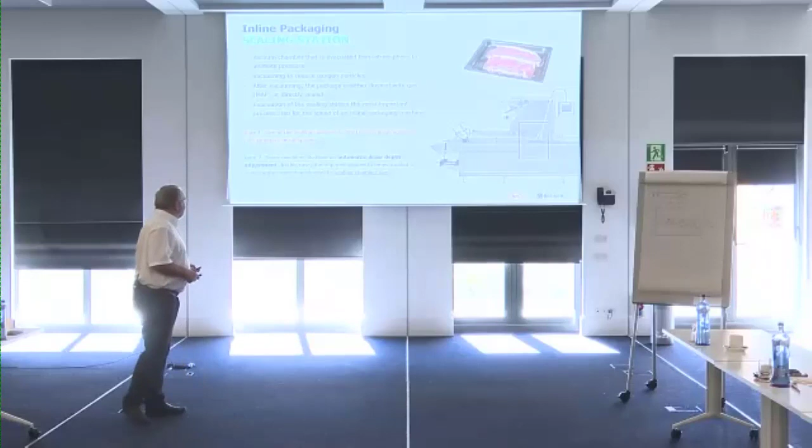Probably you are going to explain it afterwards, but what about the oxygen version, this kind of modified atmosphere, for regassing with oxygen? Yeah. Yes.

That is a problem - it's not a problem, but you have to be aware, if you are making modified atmosphere packages under oxygen, then in most cases you need special vacuum pumps. The problem is, normally the sealing chamber is evacuated down to final pressure, the vacuum valve is closed, then you open the gas valve and flush with oxygen. So no oxygen may come into the vacuum pipe. But if there is a broken valve, if there is damage in the machine and the vacuum valve is opened, then you will get oxygen into the vacuum pump.

If you have an oil lubricated vacuum pump with hot oil and you have oxygen, the pump may explode. I don't think it will explode, but it will burn. I have seen a lot of pumps which burned down. I have made a lot of reports concerning these pumps for insurance companies, that they burned due to oxygen which comes into the pump.

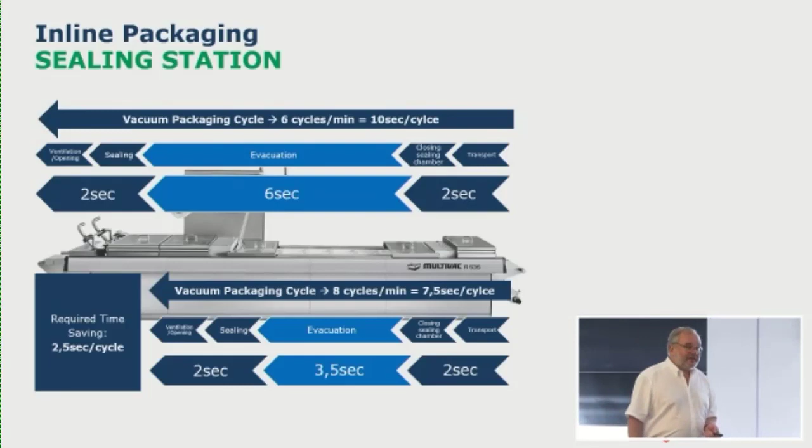And this is, with the centralized vacuum system, no problem at all. The 6 seconds we will reach with a normal vacuum pump, a rotary vane pump, 300 cubic meters per hour in the machine. For the fast evacuation...

One second. So this is the normal integrated vacuum pump setup: a rotary vane pump for the forming station, a rotary vane pump for the sealing chamber, or a combination of a rotary vane pump and a booster pump, directly integrated in the machine or installed beside the machine.

The disadvantages we have discussed before: the heat into the cooled area, the negative energy balance because we need a lot of energy to re-cool the heat in the room, and we have to stop the machine if the pump fails. Yes, please, sorry, just a little question.

I have a customer that put a side channel pump in the forming area. It makes sense with special protection and so on, but a side channel. Yeah, a side channel blower. Normally, the final pressure of a side channel blower is maximum, let's say, 300 to 400 millibar.

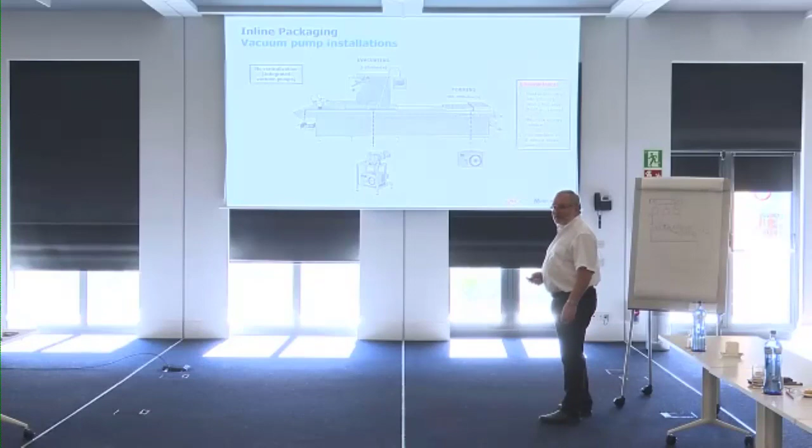And we have the problem that if the pump fails, we have to stop the whole packing line. So therefore we install the centralized vacuum system, which is connected with a pipe net, and to the pipe net all packing machines are connected, and the same with the forming station.

Now we have no heat in the production area, the fastest possible evacuation, and no problem if a vacuum pump fails, since the standby pump is fully automatically turned on. So let's make an example.

We have a company called the Oktoberfest Sausage Company. They're making special sausages for the German Oktoberfest. This company has some packing machines: one inline thermoformer from GEA, three Multivac inline thermoformers, and one Webomatic chamber machine. And this customer is interested in a central vacuum supply.

First of all, I need some information about the packing machines. I need to know the size of the sealing chamber, that is, the index length of the machine, the width of the foil, and the maximum forming depth, depending on the product of the customer.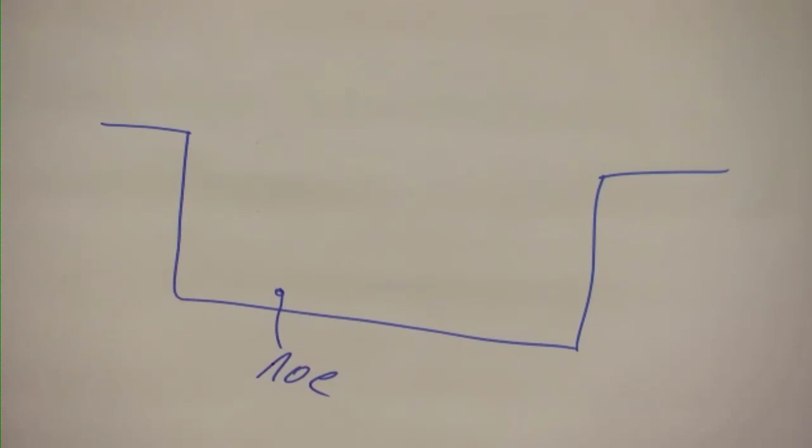This is the bottom film. The bottom film is formed, and let's say we have a volume. This volume, let's say, is 10 liters. Now, we put in the product, only one sausage. The volume of the sausage is 1 liter.

This is in the sealing chamber, the top film. The package, the sealing chamber is evacuated. Final pressure, very good final pressure, 1 millibar. Now we seal. The upper foil and the bottom foil are sealed together. Now, sealing ended. Now we are releasing the chamber.

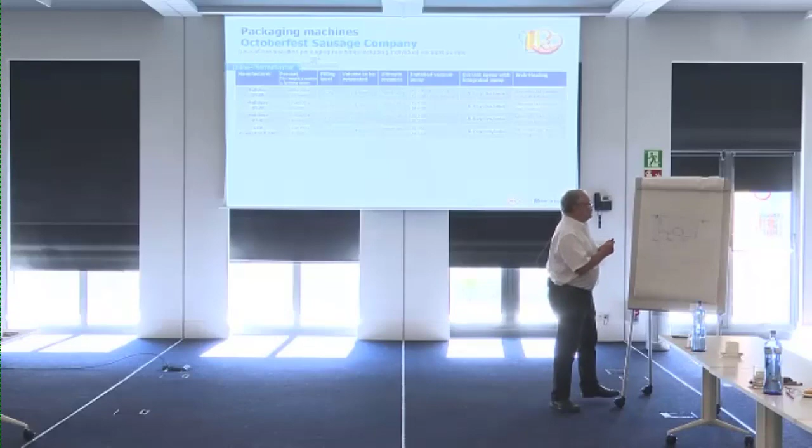What will happen with releasing of the chamber? The foil is pressed on the product like this. So we have reduced the volume from 10 liters to 1 liter. What will happen with the pressure? It is the so-called law of Boyle and Mariotte, and this law says, in a closed system, the product of the pressure and the volume is always constant.

We have a closed package from 10 liters, which is pressed to 1 liter. So the pressure will rise up from 1 millibar to 10 millibar. And that's a problem. Therefore, you have to adapt your package to your product. This is very important due to this problem.

Okay, sorry for the sidewalk, let's go back here. So I need to know the filling level, because the volume which has to be evacuated is the volume of the sealing chamber minus the volume of the product.

Therefore, I will have the volume. I need to know the final pressure. I need to know the pumps you have and the current speed of the machines.

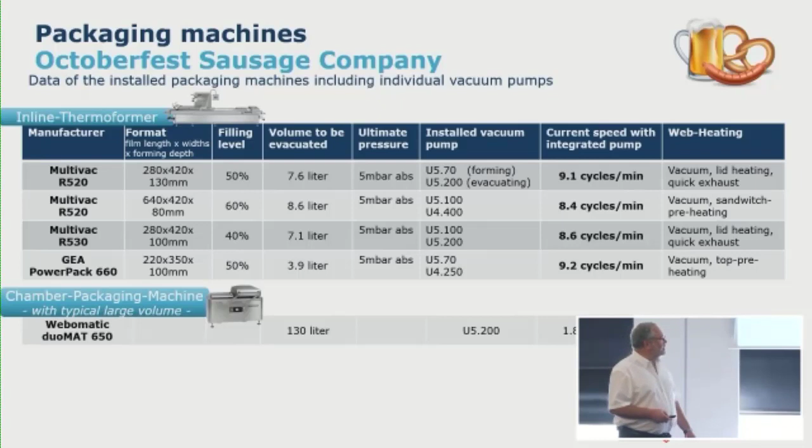I have the chamber machine with the volume, the pump, rotary vane pump, U5.200, and the performance of 1.8 cycles per minute. Of course, for the chamber machine there is no forming of foil. For the thermoformers, I need to know what kind of forming station, what kind of heating of the foil.

So, now the customer wants to remove the pump and he wants to increase the performance. I want to increase his production.

So option one, if you need to increase production, install more packaging machines, further packing machines. Or option two, increase the performance of the existing machines. That is to say, to achieve the higher cycle rate, option one is to install a further packing machine. That means higher production, higher cycle rate.

Oh, sorry, I've been too fast. By installing a further packing machine, he can increase his production without any problem. By installing a central vacuum supply, he can increase the production, and furthermore, he can decrease the energy costs, the operating costs. He has a backup pump, and the hygienic aspect.

No more pump in the packing room. So I think the advantages of option two, increasing the performance of the machine by using a centralized vacuum system, are very impressive.

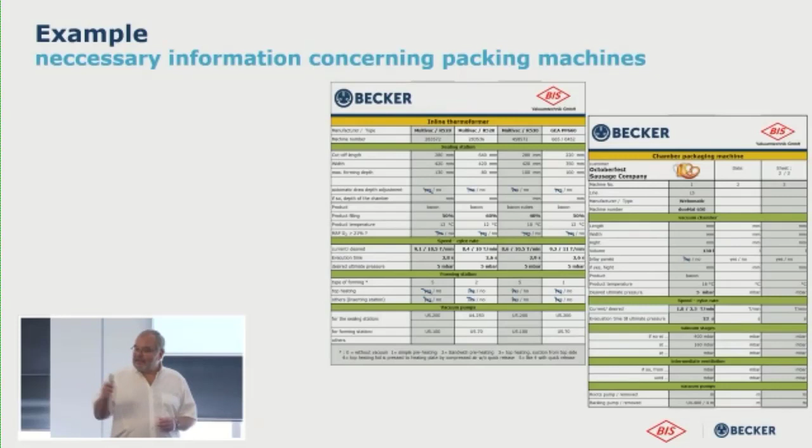Yes, please. Thank you. If we know the brand of the packaging machine and the model, can you know all the rest of the details?

No, unfortunately not. Because the type of the machine, the manufacturer and the type—in this example, Multivac and R520—this is only the model of the packing machine. But for each packing machine, they have different tools with different index lengths, widths, and so on. So therefore, I need to have all this information.

A lot of customers have this information without any problem. They have it in their papers, they know exactly what kind of machines. If the customer does not have this information, or it is not easy to get, it is no problem for us to check this on site. We will visit the customer, have a look at the packing machine, check the size of the machine, the size of the chamber, check the performance, the evacuation time, and so we may get all necessary information for the calculation.

Sometimes for packing machines, for example if the machine is adapted with an automatic adjustment of the depth, then I need help from the manufacturer of the machine. But this is no problem. If I know the type of the machine and the serial number, I will contact the manufacturer and ask every detail I need to know. And with all this information, I can calculate the central vacuum supply.

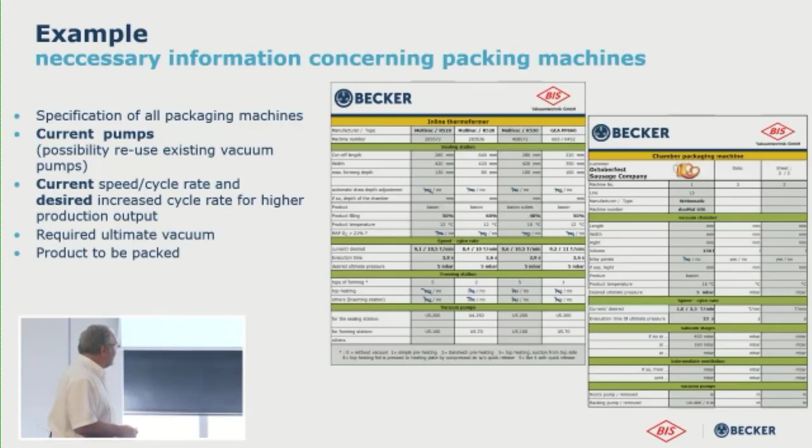Sorry, another question. Yes, please. To use the existing pumps—is there a brand or a model that is not possible to integrate into a central system?

No, no, no. I do not know. There are some old pumps—some old Busch pumps, double stage pumps, which are not very easy to install. Makes no sense. But most types of pumps may be used.

And by the way, is there any packaging machine, any brand of packaging machine, that is not able to take part in the centralization? No, no, no, not at all.

Okay, on the basis of this information, I have calculated the central vacuum supply. We have the auxiliary vacuum, with pressure between 60 and 150 millibar. Once again, this maximum 150 millibar—we will have the maximum pressure if all connected packing machines are evacuating at exactly the same time.

We need a pipe with a diameter of 225 millimeters, 30 meters long. We need an additional buffer—sometimes I need additional volume, I need tanks. If the machinery room with the central station is near the packing area, and in this example I only have a pipe net of 30 meters, I do not have enough volume in the pipes, and therefore I need additional tanks. But this is not a problem to install. However, if the pipe net is longer, maybe I do not need tanks.

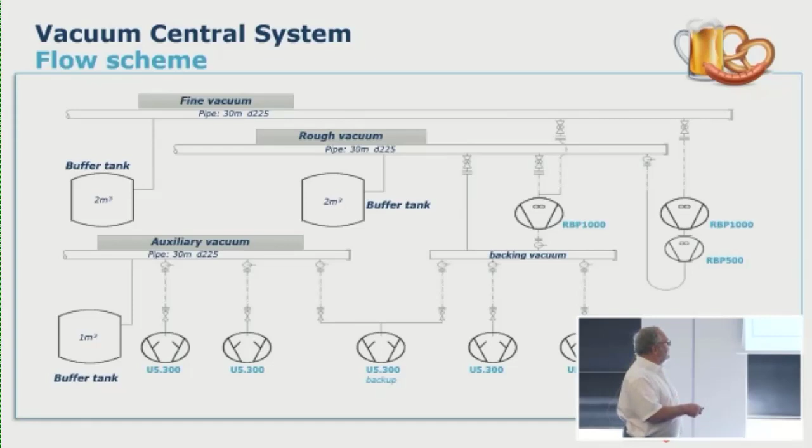If the pump in rough vacuum fails, the 3 pumps here are running together for rough vacuum. If one of the fine vacuum pumps fails, this pump is running for fine vacuum, and again the 3 backing pumps for rough vacuum. So we have a fully automatic turnover to standby if a vacuum pump fails. And the backing pump is necessary in a central vacuum supply.

Before, with the integrated pumps, for these machines, this customer had a lot of pumps in use: 2 times 70 cubic meter, 2 times 100 cubic meter, and so on. With the central station, we only have 4 rotary vane pumps, 300 cubic meter per hour, 3 booster, and 1 for standby.

That is to say, with the individual pump we had 37.9 kilowatt energy consumption. With central station, only 32.2 kilowatt. That's to say, less installed power for vacuum generation within a higher cycle performance of the packing machines. So that is to say, I do not need more pumps. Normally I need less pumps than before because the pumps are better used, what I've explained before.

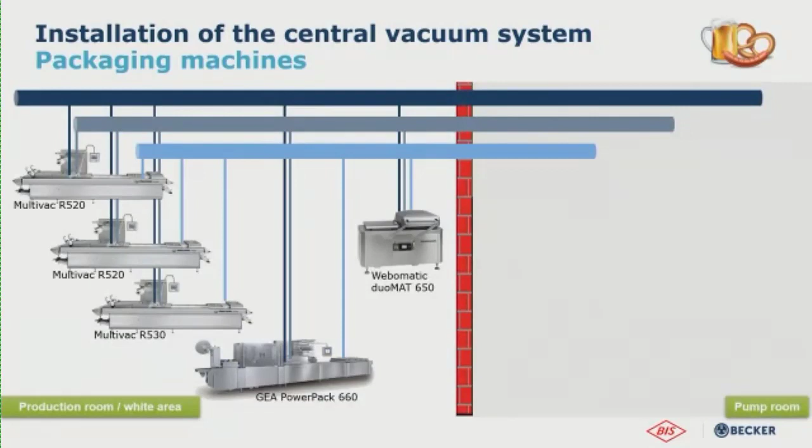So we have the packing machines in the white area of the production room, in the hygienic area. We have a pipe net, 3 big pipes, 225 millimeter, which go from the packing room up to the central vacuum station. We have 2 pumps for auxiliary vacuum, 1 booster with 2 backing pumps for rough vacuum, for fine vacuum. I have additional tanks and the standby pump. Control cabinet.

Once again, the number of machines with the cycles, and we have increased the performance. For line number 1, the Multivac, from 9.1 cycles to 10.5 cycles per minute, only by faster evacuation. I can't give you any number how fast a packing machine will be by connecting it to a central vacuum supply. It is depending on the type of the machine.

Let's say if you have a packing machine making flat packages, 20 millimeters for sliced sausage, you have a very small volume of the sealing chamber, and a very big vacuum pump installed in the machine. The evacuation is very fast because you have a big pump and a small volume. Maybe I can save 0.1, 0.2 seconds, but not more.

So in this example, the increase in cycle performance is between 15 and nearly 40%. It is for the big trimmer machine from Webomatic. Normally, for the big trimmer machines, it is always possible to increase the performance.

Let's say you are packing 12 hours per day, 240 days per year, staff per machine 3 workers. And it's not only for the packing machine, it is for the whole line. That is to say, maybe there's a slicer in front of the machine, you need 1 worker for the slicer, 2 for the packing machine itself, 1 for the packer afterwards. So you have to calculate for the whole line.

So I think this is not a lot of workers for the whole line. Let's say 3 workers. The cost for the workers is 15 euros per hour, and cost for the machine, for power, gas, compressed air, let us say 5 euros per hour.

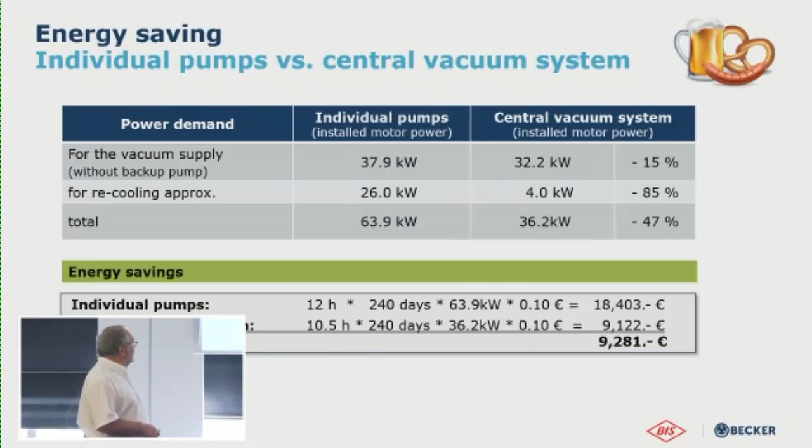Next point is the power consumption. We are saving energy. In this example, with the individual pumps, 12 hours per day with 63.9 kilowatt. With the central vacuum supply, we only run 10.5 hours per day and only 36.2 kilowatt. That is to say, we are saving 9,200 euros for energy. This is calculated with energy cost of 10 euro cent per kilowatt hour.

That means we are saving 90,000 euro by increasing production and saving energy. We are saving operating costs because you do not need to stop the machine for maintenance and so on. It's a total saving per year of 100,000 euro. That means the investment of 120,000 euro is repaid after 14 months.

And this is what I've told you before. Central vacuum supply for packing machines will be repaid in a very short period. From my experience, the repaid time is between 6 and 20 months, only by saving energy and increasing production. And beside this, you have the hygienic aspect.

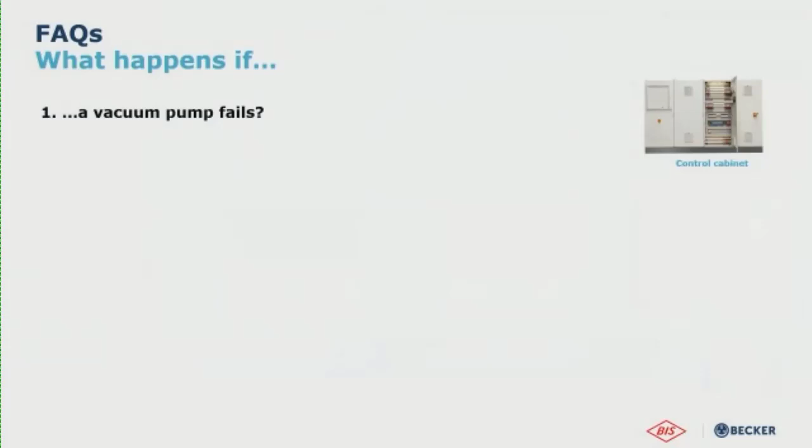Then, frequently asked questions. What happens in the centralized vacuum supply if the vacuum pump fails? Nothing. No effect on your production. The standby pump is switched on fully automatically. It is not 1 second without production. And then you have time enough.

In the packing room, you will have a sign, a red light, or anything else to show something is wrong in the central vacuum supply. You send the technician to the machinery room. He can check, okay, a pump has failed, I can repair it, remove it, replace it, or anything else. But there's time enough because there's no effect on the production.

What happens if the operation terminal fails? That's no problem. We have a big operation panel in the enclosure. There you can turn on and off the station. You can say, okay, I want to make repair work at pump number 3. Press pump number 3, turn off. The pump is turned off. The standby pump is fully automatically switched on, and you can make the maintenance work.

If there is a failure at the pump, you can see on the panel, okay, the problem is oil temperature at pump number 6 or anything else. If this operating terminal fails, the central vacuum supply is still running in automatic mode without the panel, without any problem. But if one pump was set into repair work to stop for repair, and now the terminal fails, you have no chance to put it again into normal operation. Therefore, you open the enclosure. There are two switches you have to press at the same time for 5 seconds, and all is set again back to normal mode. So it is running in automatic mode also without the terminal in the enclosure, without any problems.

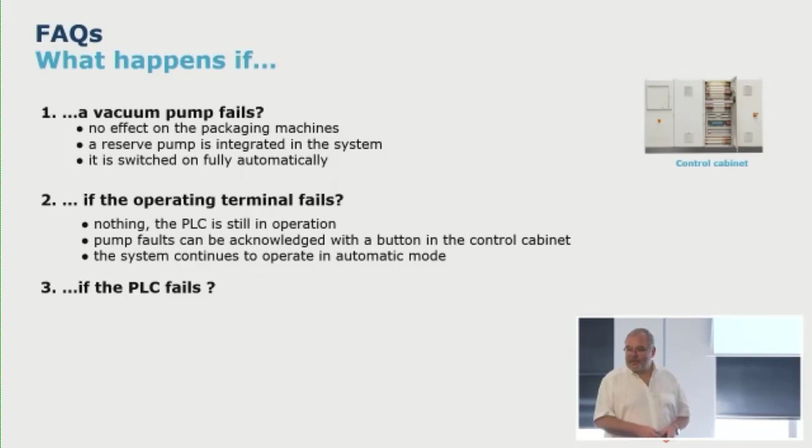Over the last 40 years, we have built more than 350 big central vacuum supplies, and only 2 stations failed, where they had to stop production for a longer time. One was a meat processing plant in Belgium, where the packing room burned down. The second was a meat processing plant in Germany, where the whole machinery room burned down. But these are the only 2 times our central vacuum supply failed totally, and the burning was not caused by our central station.

Thank you very much. I have another question. When you calculate how much time you need to recover the investment, when you make these calculations, are you thinking about the integrated pumps running all

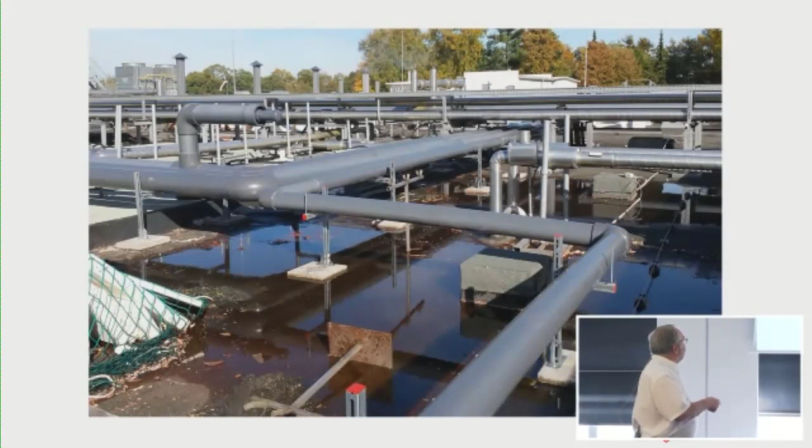The pipe net: here you can see pipes in PVC, which can be installed outside or inside the building. Then we have small branch tubes - the big pipes are here under the ceiling, then small branch tubes down to the machine, ball valves, and then a flexible hose, normally in PVC, or also possible in flexible stainless steel hose.